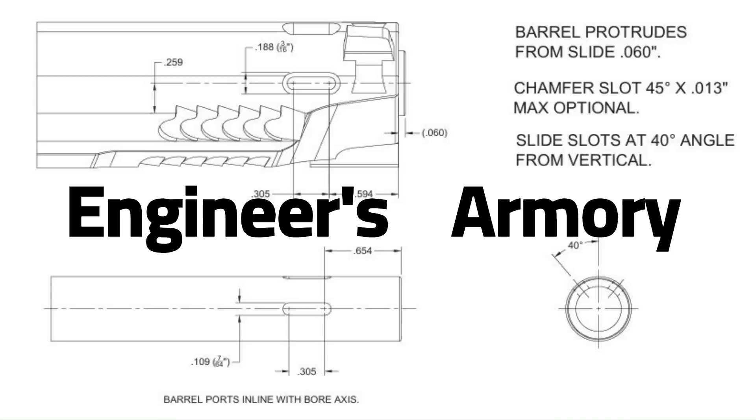What's up, everyone? This is going to be a two-part video. The first is a detailed look at the full 1911 barrel fitting process. I've wanted to make this for a while to round out my 1911 technical content playlist. The second part will be episode 2 of my building a double stack 1911 video series, where I fit the barrel to my pistol.

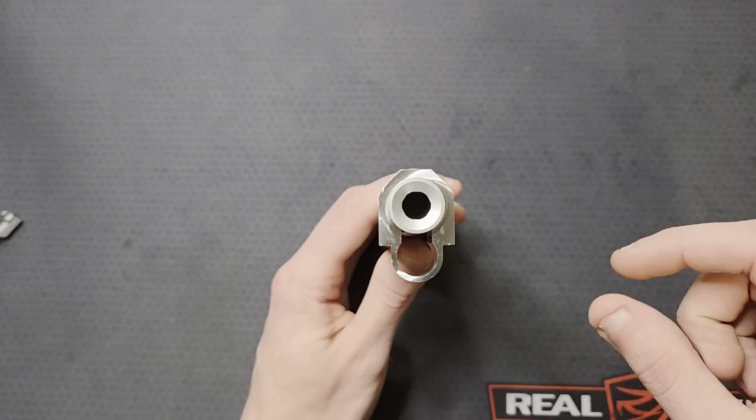I want to look at how the barrel is held still at lockup. All 6 degrees of freedom must be constrained. That means translation along 3 mutually orthogonal axes and rotation about those same 3 axes. At the muzzle end, the barrel is constrained from translating up and down and side to side within the clearances of the barrel OD and the slide or bushing ID. It can rotate a little bit like this, which is good because we need the barrel to tilt. It's free to slide along this axis and rotate about it.

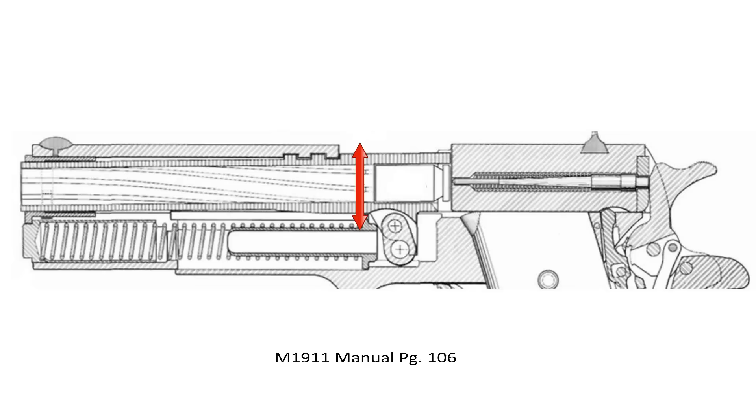At the chamber end, a nicely fit barrel is kind of pinched between the lower locking lugs on the slide stop cross pin and the top central point of the upper locking lugs. This is called the support triangle. Translation up and down along this axis is stopped by these 2 points. And rotation, if we consider the lug contact to be the pivot point, is stopped here and here. The barrel is constrained from rotating this way because the lower lugs are contacting in 2 places across the slide stop pin.

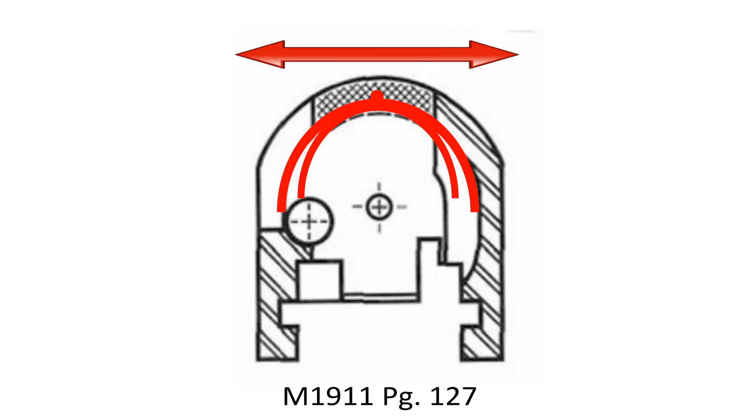If I push a circle into a circle, it centers itself into a point in line with the applied force. Now what if both of these circles are actually cylinders? Their 2 central axes will tend to align when you push them together. At the upper lugs, a circle meets a circle and the barrel centers itself, preventing translation this way. But the upper lug surfaces are cylindrical, so that also prevents the barrel from rotating this way because of the tendency of the axes of the 2 cylinders to align. And at the muzzle end, the barrel is being pushed down into another cylinder, preventing it from translating this way and rotating this way.

The bull barrel cylinder is cut out on the bottom, so it's actually contacting on two edges, but they're doing the same thing. With a bushing barrel, it's a full cylinder.

Constraining translation in this direction, which we know the muzzle end cannot prevent, comes from the chamber hood and upper barrel lugs being pinched between the slide lugs and breech face. On some ordnance spec pistols, the hood doesn't contact the breech face, but this face does right here. This is unlikely on any gunsmith fit barrel.

What are some relationships that don't contribute to constraining the barrel? Hood width doesn't - I mean, it could, but I don't think it's supposed to. It's generally clearanced as a final step to the fitting process.

The barrel link at lockup shouldn't be doing anything. Any surface or point of these lower lugs or ramp, except right here and right here, where it contacts the slide stop pin. This radius and kind of vertical face on the bottom of the lugs does contact the slide stop pin. This doesn't really constrain the barrel to the slide, it stops the forward movement of the slide and barrel together.

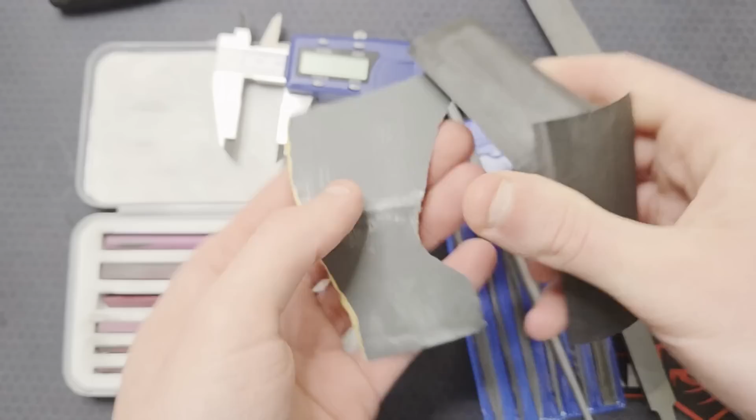You will need feeler gauges, a couple of which you'll need to modify. You need calipers, a selection of stones and files, fine grit sandpaper, a Sharpie or some layout dye, maybe some lapping compound. Clay helps for taking lug engagement impressions, access to a mill and fixture, or an indicator or a jig for fitting the barrel hood length and width by hand. Personally, I wouldn't do this without access to a mill.

Hood length gauge or inside micrometers. Firing pin port gauge is really nice. A lug fitting file. A lug centering block. A barrel holder and a lower lug cutting tool. A chamber finish reamer - I would recommend cutting fluid.

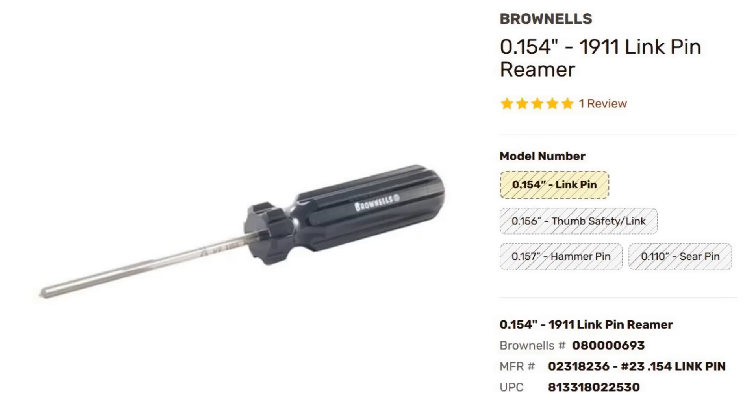Head spacing gauges are not necessary but may be nice. A reamer for the barrel link pinhole will most likely be needed. If you're fitting a barrel bushing, a lathe will really make that easier.

This basic process is outlined in the M1911 Kuhnhausen manual, pages 125 to 135. I'm omitting quite a few details for simplicity and time's sake. There are some things that could be done in a different order, or aren't even called out in the steps on those pages, so I'm putting them in where it makes sense to me. There is some subjectivity with this order of operations, but I don't think what I'm presenting is blatantly wrong or would lead to ruined parts.

The scope of this process will be limited to gunsmith fit barrels. They have extra lower lug material. Generally these slots here are shallow. They have a short chamber, and the hood is too long and too wide.

I'm finding as I work through this process that having a barrel and slide from the same manufacturer is nice. These are both from Atlas. Any high quality parts should be within spec, but if any barrel and slide combo are going to have dimensions and tolerances with the best chance of agreeing, they're probably going to be ones from the same manufacturer.

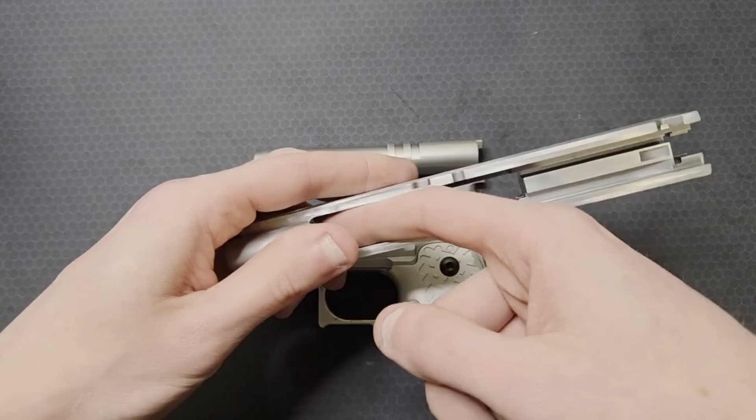There is technically a first measuring step that I am skipping, but I will cover it later in the horizontal bearing surface check section and explain why you're probably not going to do it. First, it's a good idea to inspect the slide, barrel, and frame, look at any contact areas between the barrel and other components, maybe lightly polish or deburr the barrel passage in the slide, break any sharp edges on the lugs, but just barely - things of that nature.

Muzzle end fit is important, but on bull barrels it will likely be dictated for you. The slide barrel passage spec is from .699 to .702, and bull barrel diameter is generally .693 to .695, leaving us with a diametrical clearance range from 4 to 9 thousandths. I just checked that the barrel slid in there and cleared the upper lugs on its way in. There are some comps and sight blocks that thread on and their OD will need machined to fit the slide.

In a bushing barrel system, Kuhnhausen says the barrel fitting is done with a slightly loose bushing. This is the way I've seen some professionals do it too. Check that the temporary bushing doesn't interfere with the barrel as you're fitting. However, I didn't see it directly stated when you should fit the final bushing.

How much of that fitting do you do with the looser bushing? I think I figured it out as I've worked through this process, and we'll put that step in where I think it goes and makes the most sense to me. Again, there may be some ambiguity or subjectivity with the order of these operations.

Measure the slide hood slot width and the barrel hood width. Take material off the hood until it just slides in all the way back up against the breech face, and don't clearance it any more than that right now.

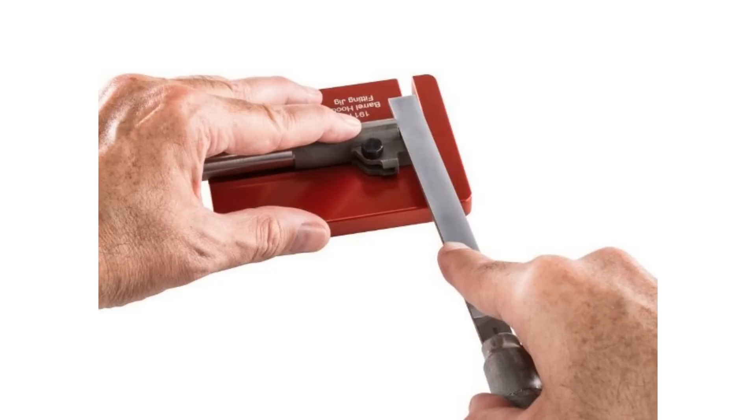There are fixtures for milling these hoods that will greatly reduce setup time. EGW makes one. There is an Apex Tactical fixture to be used with a file, but it doesn't look like it'll help you keep the hood sides square.

Now that the hood slides back up against the breech face, material needs to be taken off this surface until the hood slides all the way up and stops on the upper lugs, in a condition called 100% vertical lockup. We want this because it will maximize accuracy by producing the tightest barrel fit.

On the slide, measure the distance between the breech face and the forward locking lug. Because the lug surface is offset inward from the ejection port, a special tool is required. There are gauges for this. EGW makes one. I used a 1 to 2 inch inside micrometer.

Measuring the hood length on the barrel is easy with calipers, just like that. See how much needs to come off. 10 thou needed to come off this one.

Again, not a good thing to do by hand. The surface is likely to wander. Machine all but maybe a thou off and fit by hand.

Keep this surface as square as possible. Take a tiny bit off and check it. Sharpie on the surface helps to see if material is coming off evenly.

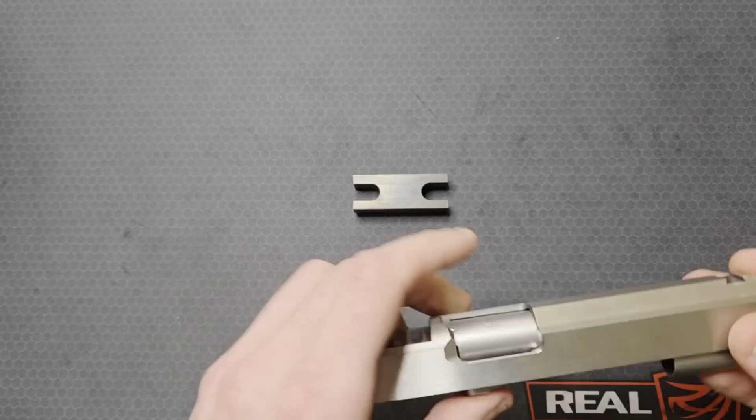Just take off enough material that it slides up and down freely, but does not have any play back and forth. Make sure the barrel is solidly stopping on the upper lugs and not interfering with something at the muzzle end, like the bushing skirt or the barrel passage with a bull barrel. It may feel springy up towards the top if it is.

Now that the hood adjustment is done on this face and mainly done on these two, reestablish chamfers if needed, break edges, smooth it up so it won't have any issue sliding in and out of lockup easily. I got a little generous with these chamfers right here, but these other ones are more reasonable.

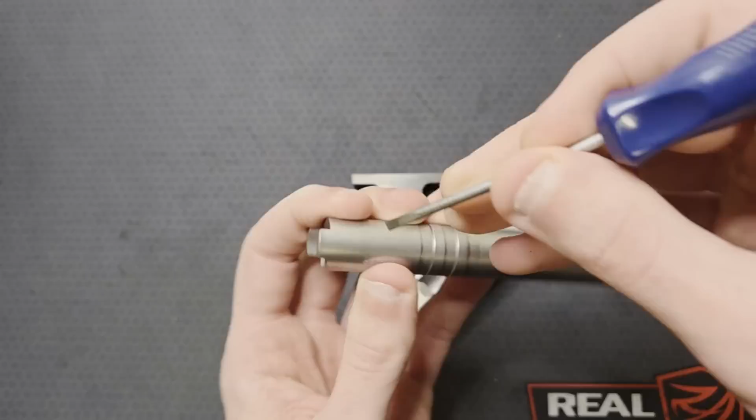I had to chamfer this corner, this guy, and this guy. This chamfer was still there after I removed my material, and I broke some sharp edges down around here with a stone.

Now that we can push our barrel into 100% lockup, we need to check where the firing pin port in the slide ends up in relation to the chamber. Center the lower lugs with one of these blocks and put firm pressure on the barrel.

You can buy gauges for this. I went ahead and machined my own. I can drop this in and see that the little nipple on the end slides right into my firing pin port without any resistance.

Another way to check this would be to take the primer out of a case and fill the primer pocket with clay. The chamber of a gunsmith fit barrel will be short, so it probably won't go into lockup. You may need to trim the case shorter.

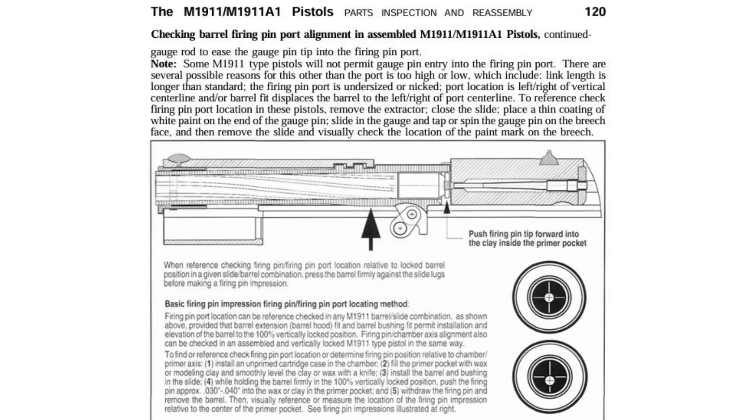Once the case is in there, you could drop the firing pin in from the back and see where it hits the clay. If it's off side to side, that might be an issue. There could be something wrong with the machining of the slide or the barrel, maybe a non-concentric chamber or a firing pin hole that's drilled off center.

You're unlikely to run into this with quality parts. If the firing pin port is high, meaning the chamber is low, that's not a huge deal. Most gunsmith fit barrels err on the side of shallow slots right here.

Remove some material until the chamber goes up enough to center the firing pin. If the firing pin port is low, meaning the chamber is high, the slots in the barrel could be too deep. The barrel passage diameter could be too large, meaning these lugs are too high up. It's unlikely that you'll run into this with a gunsmith fit barrel and high quality parts.

So how far off center is acceptable? I couldn't find a spec, so I looked at the tolerancing on the ordnance dimensions and did some math. Remember, these diagrams are for 45 ACP chamberings and a 92 thousandths diameter firing pin. Firing pins now are commonly around 68 thou.

I'm only considering the barrel and the slide relationship at 100% lockup, which is where we are at in this process. Possible deviation will increase when the slide and barrel are on the frame due to tolerance stacking of the frame rails, pinholes, pins, less than 100% vertical lockup engagement, etc.

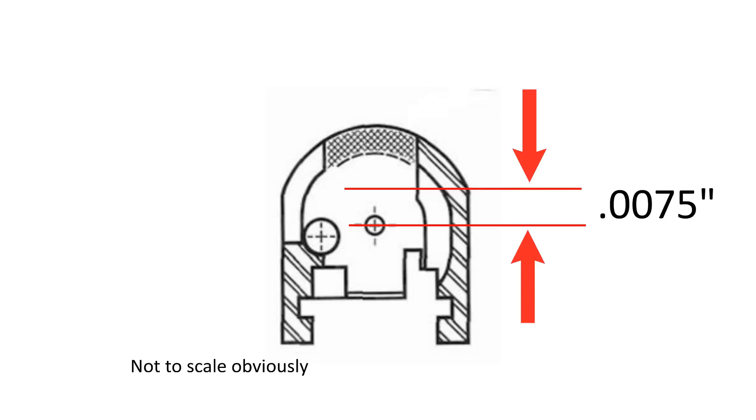I calculated that there is an allowance for the firing pin port to be displaced from the chamber center by about 7.5 thou. So a 15 thou range in the vertical and horizontal direction based on the dimensional tolerancing of the barrel and slide mating features, clearances, and firing pin port location.

This is a rough calculation. I'm guessing the acceptable operating range is a bit wider than that. If the firing pin is too far off, it may pop primers or the firing pin could be damaged, leading to all sorts of reliability issues.

Now this is the point. Barrel lug slot depth would be adjusted to achieve vertical firing pin port alignment at 100% vertical lockup. Brownells makes a special file for this. It has a narrow cutting face and dead sides so that no material will be taken off the vertical faces of the lug slot.

Don't cut any slot lower than 63 thousandths. You really shouldn't have to. That is the maximum slot depth according to ordnance spec.

This requires that the barrel has enough extra material on the lower lugs. If the chamber goes up, there still needs to be enough meat here to cut away for proper fit with the slide stop pin. A gunsmith fit barrel will likely have more than enough.

You shouldn't have to worry about it, but it doesn't hurt to check. You should really have one of these tools for this project. Use that in your barrel alignment block to make sure your chamber is in lockup.

You should see lug material sticking through your slide stop pinhole. That means there's enough material there.

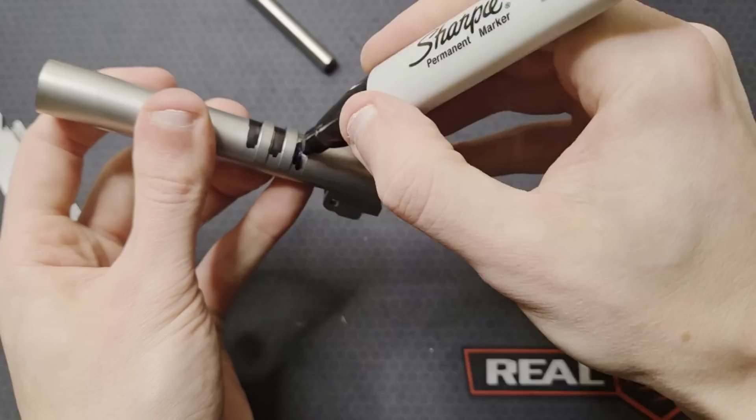To figure out where the lugs are contacting, mark them with a Sharpie or Dykem, push the barrel into lockup, and maybe give the lower lugs a little tap with a soft mallet to make a mark. That will show you where material needs to come off.

It may be easier to see what Sharpie gets left on the slide. Likely only the rear lug will be touching. Take a little off, check, repeat.

Take material off evenly and try to maintain that constant radius. Don't make a flat spot or a facet. I needed to take a little material off my rear barrel lug slot to get the chamber up higher. I was able to use my 1911 slide rail file that had a narrow cutting edge and two dead sides.

I want to discuss vertical lockup engagement. This is a hot topic, so keep in mind this is just my interpretation of the information I have found, but I will also be presenting my own calculation. I hope it makes sense and also doesn't have some glaring issue that completely nullifies it. I'm trying to demystify this all to myself as well.

In the context of fitting this barrel, this slot is 44 thousandths deep after my adjustment. If I fit the lugs properly, I will maintain 100% engagement here, or 44 thousandths of an inch on this vertical lug face. Is that enough?

This is going to be a long section, but I think it's a valuable discussion to have. Remember, timestamps are a thing. Skip it if you want.

This is more broadly about assembled pistols, not just the barrel and slide relationship we've been considering so far. The fit of the lower lugs on the slide stop pin, the frame rail aggregate stack height, pinhole location, and pin diameters, etc. can all affect vertical lockup engagement. A production or ordnance spec gun with no hand fitting will likely not have 100% lug engagement.

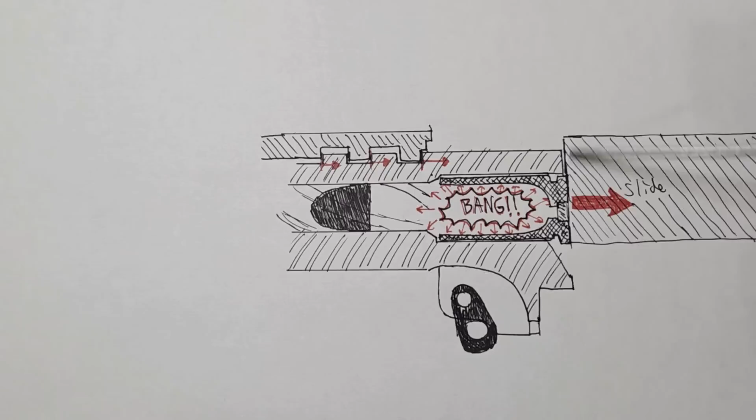The cartridge case slips in and out of the chamber. There may be some friction on the way out after the round is fired and the brass is expanded. However, the majority of the rearward force, which is a reaction to the momentum and energy of the round being fired and the pressure spike in the case, will be imparted on the breech face via the case head.

Initially, the slide and barrel travel rearward together. That initial pressure spike presses the case back into the breech face and starts the rearward motion of the slide. The barrel gets pulled along with it only by the small contact of these vertical lug faces.

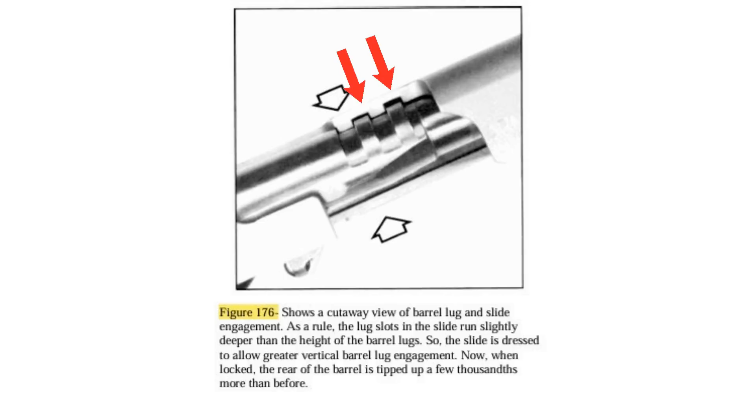Let's cover some geometric and dimensional considerations and how to measure engagement. The barrel tilts down towards the muzzle end at lockup. The chamber area and slots in the slide are machined at a slight downward angle too, but probably not as much, so each lug moving forward will have fractionally less engagement. By how much will depend on the fit of the parts in the pistol. That's why lug engagement is measured here at this first lug.

The forward two slots in some barrels may be deeper than the first. The slots in the slide should be clearanced for the barrel lugs. Contact should happen like this, not like this.

Vertical engagement is usually given as a percentage. How much of this total face height is contacting the lugs in the slide? I don't find this very useful. For an ordnance spec barrel, these slots can be anywhere from 53 to 63 thousandths deep. On gunsmith fit or match barrels, I've seen this range around 42 to 58 thousandths. So 60% on one barrel probably won't be 60% on another. If you have 100% engagement, but the slot is only 10 thousandths deep, that's not enough.

To measure engagement depth, measure down to the hood of the barrel from the top of the slide at lockup. Now pull the slide to unlock it and hold it at the point just where the barrel clears the lugs in the slide, and measure again. Then you subtract those two values. For percentage, you would divide that by your total barrel lug slot depth and multiply by 100.

Another way is to put some thin strips of clay in the slots, coat the lugs with oil, talc, or graphite first so the clay doesn't stick. I got some children's modeling clay for this. It comes in fun colors, and this one tastes really good.

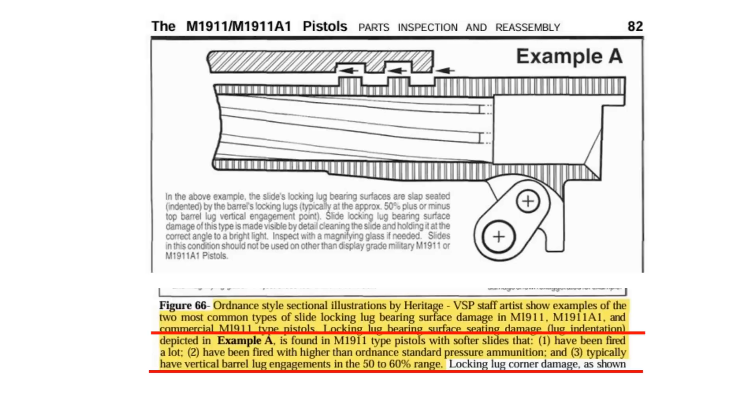The minimum ordnance spec slot depth is 53 thousandths. 50 to 60% of that is 27 to 32 thousandths of engagement. In the Colt 45 manual, page 51, I found this: a minimum of 42 thousandths, or about 70% of a mid-spec slot depth.

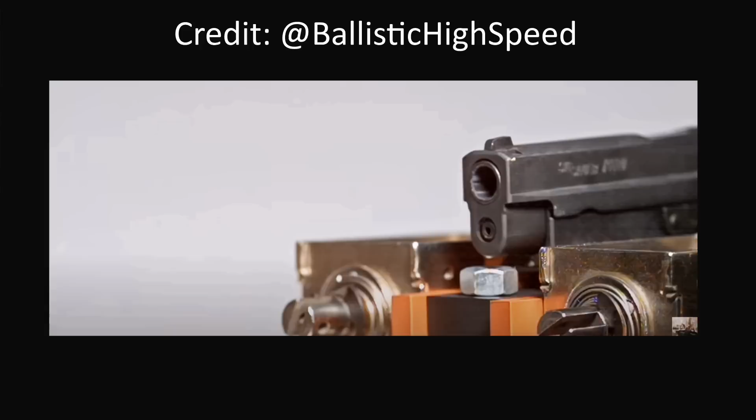I want to look at this from a strength of materials standpoint. For all the following calculations, I will be using the worst case scenario to give me the most conservative and safe estimate. I am assuming that all the force imparted on the slide will be transferred to only one lug, and the highest force the lug will see comes from the initial pressure spike in the case at the instant the round is fired. It's not feasible for me to consider energy, momentum transfer, slide, barrel, bullet, and gas masses, and include all that from the moment of ignition to the time the bullet leaves the barrel. I wouldn't know how to include those in my calculations. So much is going on in those few milliseconds.

Modern 1911 barrels are usually made from 4140 or 416 stainless, slides from 4140, 416, and I've seen some made out of 17-4. I'll link to some sources in the description with good information about these materials and where I got some of the charts and tables I'll be showing.

Yield strength refers to the stress a material can handle before it plastically deforms, meaning it deforms then stays that way when the force is removed. These materials are ductile and tough enough that they will yield before they fracture.

I have access to ASTM, ASME, SAE, and American Society for Metals books at work. These are the organizations that create standards for materials, among many other things, for use in a wide variety of industries. I looked up a bunch of specifications for these materials. I will be referring to these yield strengths in KSI, that is 1000 PSI. This is commonly how they're reported using imperial units. All of these materials are heat treatable for a wide range of mechanical properties.

4140 can have a yield strength ranging from 60 to 125 KSI. That lower 60 KSI yield is from a softer hot rolled and annealed or normalized state. It's unlikely that a 4140 slide or barrel would be machined from something this soft, even before coating or other treatment like nitride.

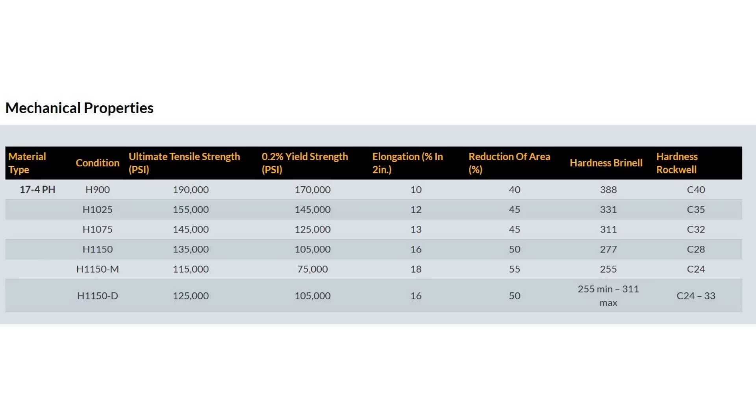17-4 stainless. Most of the 17-4 heat treatments I generally see are around that 105 KSI value. The lower 75 KSI value comes from a quite uncommon condition, H1150M heat treatment, so I wouldn't consider that one.

416 stainless has a range from 40 to 160 KSI. I deal with 4140 and 17-4 a lot for my work. I'm less familiar with 416.

Atlas says my barrel is heat treated to 40 Rockwell C minimum. I looked at the yield strength and hardness ranges of heat treated 416, and the ones that were around 40 Rockwell C plus or minus 4 had yield strengths from 115 to 140 KSI.

I will assume the lowest yield spec material used for the barrel or slide construction, not considering any surface treatment, is going to be 4140 with a yield strength of about 85 KSI in the softest common cold drawn and heat treated condition. That is the value I'll use for the calculations.

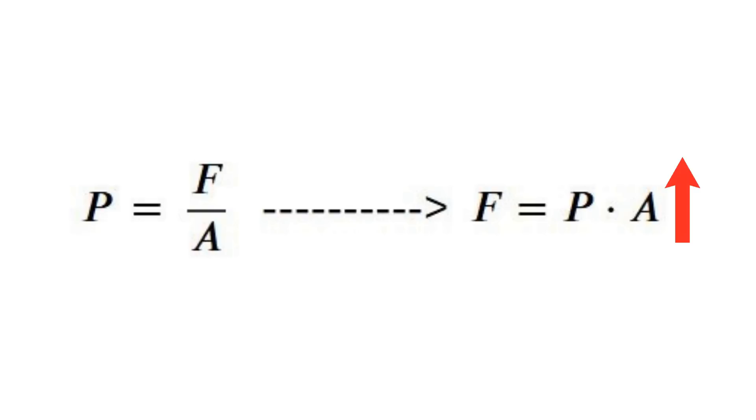I want to cover some relationships to make sure we're all on the same page. Pretty basic stuff here: pressure is force applied over an area. Rearranging this, we can see that force is pressure multiplied by area. If a force is distributed over a smaller area, meaning a smaller denominator here, that results in a higher pressure. If a pressure is applied over a larger area, that results in more force.

To calculate the force on the lug from the firing of a 9mm cartridge, I will be using the maximum average pressure for 9mm Plus P ammo given by SAAMI: 38,500 PSI. Maximum average pressure, or MAP, is defined as the recommended maximum pressure level for loading commercial ammunition. Link to this document with my page references is in the description.

I will assume that when the round is fired, the case will see a spike in pressure up to that level. The pressure will impart an impulse force on the breech face proportional to the case head area. I will assume the case head is at its maximum diameter specification and neglect the chamfer, giving us the highest resultant force.

38,500 pounds per square inch multiplied by the area of the case head, which is pi over 4 times 0.394 inches squared, gives me 4,694 pounds of rearward force on that breech face, which will then be transferred to a single upper lug interface, not two or all three.

I'm going to be considering contact stress on this lug face right here, not shear stress along the lug surface like this. There's much more surface area in this plane to resist the shear force. The smaller area of one of these faces is more likely to deform than the bulk of a lug to shear, especially at the rearmost lug that doesn't have a slot behind it.

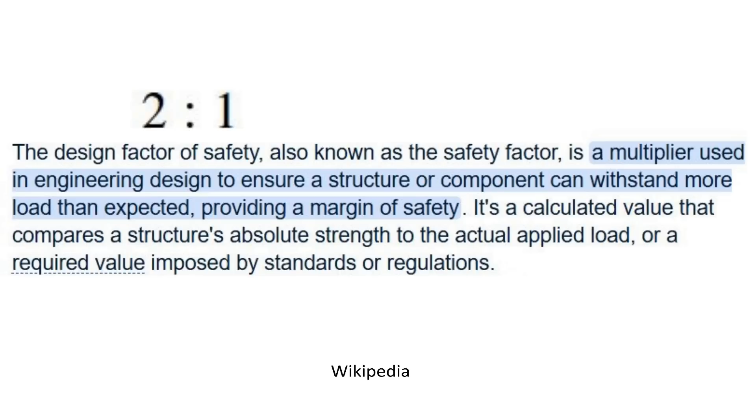I generally design with no less than a 2-to-1 safety factor. That means at normal operating conditions, a material should only see half of its yield strength, with margin for calculation assumptions in rare, extreme operating conditions and situations.

The force from the round being fired divided by the area of one of our lugs, which I am trying to solve for, is equal to the yield strength of 4140, 85,000 psi, multiplied by that 2-to-1 safety factor. So this right here is going to be 170,000 psi. Solve for area.

0.0276 square inches. Now I need to correlate that to the lug engagement depth. In my 3D modeling software, I've made a sketch of the locking face area using the minimum ordnance spec for the barrel OD. I can adjust the engagement depth value here, then extrude this into 3D space to measure the area of this face.

I adjust that dimension and check the area until it matches the area I just calculated. This occurred at about 40 thousandths of engagement depth. My model of the contact area is idealized, so this won't be representative of the real world, where actual contact area will vary from pistol to pistol and likely be a bit less, but hopefully accounted for with my conservative calculations. So that's my best estimate and recommendation for minimum vertical lug engagement: 40 thousandths of an inch for 9mm chamberings.

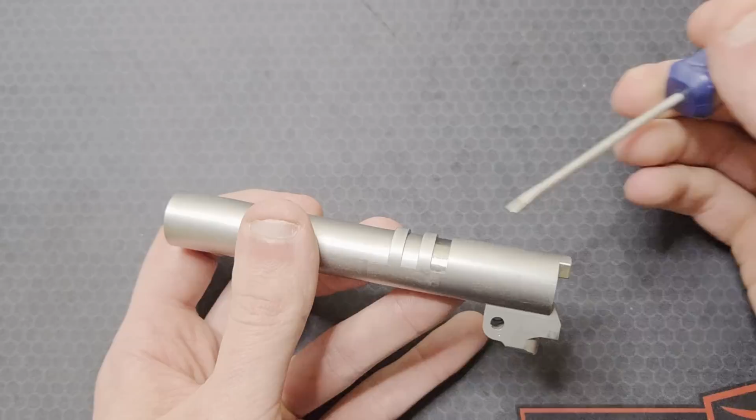Depending on the barrel, this will result in different percentages of engagement, which is why I'm not reporting a percentage. I went ahead and repeated the calculation for other common chamberings of the 1911. The only two variables changing are the case pressure, the SAAMI MAP value, and the case head diameter, and therefore the force that the lug sees. The geometry and material properties stayed the same.

For 45 ACP plus P, 41 thousandths minimum lug engagement depth. For 40 Smith & Wesson, 42 thou. For 38 Super Auto plus P, 40 thou, the same as 9mm plus P. And for 10mm Auto, 46 thousandths.

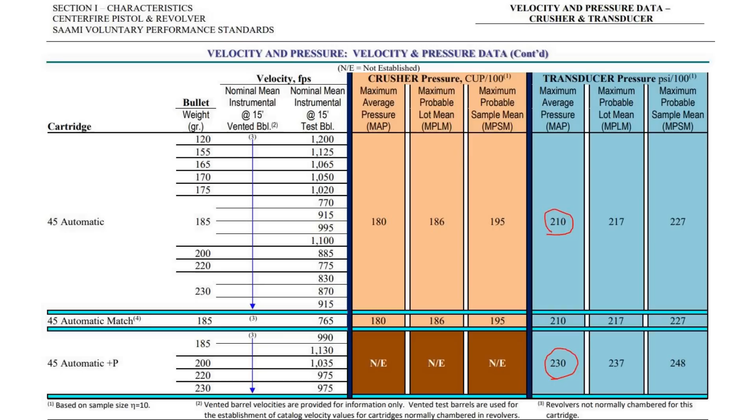Out of curiosity, I ran the calc for an ordnance spec 45 ACP pistol with 60 KSI yield strength material. This is likely more representative of early production 1911 slide material, probably 1018 or 1040, 1045 cold rolled carbon steel, that would have yield strengths from about 45 to 60 KSI. With the 2-to-1 safety factor, standard pressure 45 ACP ammunition, and one lug contacting, you would need 45 thou of engagement. This isn't really reasonable.

That is 85% of the minimum ordnance spec slot depth. A mid-spec ordnance pistol would likely not have that much engagement. However, if 2 lugs were contacting, each would need 24 thou of engagement. That's only 45% of minimum slot depth, so there would be plenty of margin for lower yield strength materials while still maintaining that 2-to-1 safety factor. We can also probably assume that the design was intended to have more than one lug in contact, being that there's 3 of them.

This was kind of a nice little gut check that my values with modern alloy carbon steel weren't unreasonable. I hope you were able to follow along with that calculation and it made some sense. I hope I explained it well enough and that my assumptions and the 2-to-1 safety factor I included seem reasonable to you. I am feeling good that the value I calculated is close to other values I've seen from multiple sources. If it was like 10 or 80 thou, I would know that I screwed up.

All right, shit, sorry about that. Back to the process.

This is an optional but recommended step, but also if you find an issue here, you're probably not going to do anything about it. In this step, we will see if all 3 of these vertical lug faces are contacting their respective slide lugs at the same time.

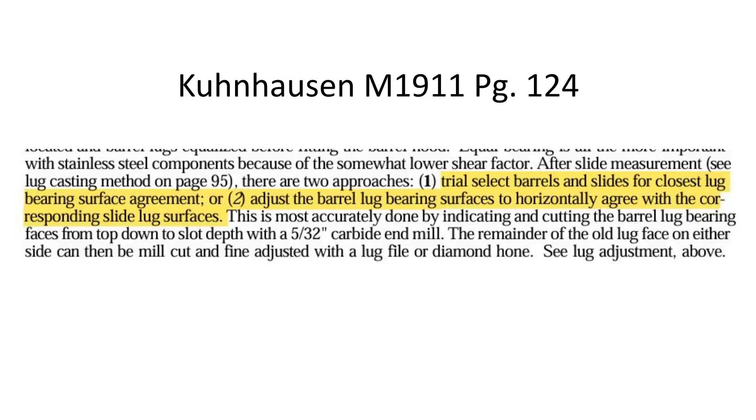You're probably not going to do this because it assumes 2 things: one, that you have special equipment to measure location of these lugs in the slide and barrel relative to the breech face, and two, that you have a bunch of barrels and slides to select from. You measure up different barrels and slides and match 2 with the closest lug spacing, then proceed with fitting from there. Also, let's think about this.

I'll go over how to check this in a moment, but let's say you only have 2 of the 3 lugs contacting. You would have to take a little material off the first 2 lugs to get this third one to be in contact. Well, you just changed the relationship of this lug to your barrel hood. We have already fit the hood length. You just brought the whole chamber forward by the amount that you removed from these lugs, loosening the hood fit.

So that's why I say you're not likely to do anything about this, even if you don't find all 3 lugs to be in agreement.

Couple of interesting historical notes here. When armorers or gunsmiths were fitting national match barrels to slides to improve accuracy, and they wanted all 3 lugs in agreement, they would equalize the lugs by removing material, then weld up the rear of the hood to add material, and fit the hood back to the breech face for no play at lockup.

On ordnance spec pistols, the hood usually isn't touching the breech face, so equalizing lugs while trying to maintain a tight hood fit was less of an issue.

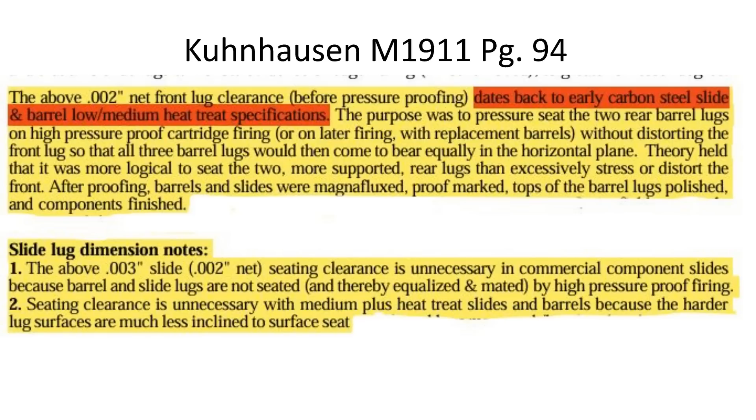I found this really interesting. The ordnance spec shows a net 0.002 clearance at the front lug. This apparently dates back to the days of softer, lower heat treat spec carbon steel slides. I don't know how common this practice was on an ordnance spec or other pistol back in the day.

That 0.002 net clearance at the front lug shows up here. I guess sometimes they would fire an overpressure proof round to seat the rear two lug surfaces and bring that third face into contact. The slide would deform at these two rear lug interfaces.

There's also a note here about how this clearance is likely not machined into commercial slides because they're made of harder material that wouldn't pressure seat anyways, so that brings us back to adjusting lug agreement by removing material, and then you run into that hood length issue unless you weld it up.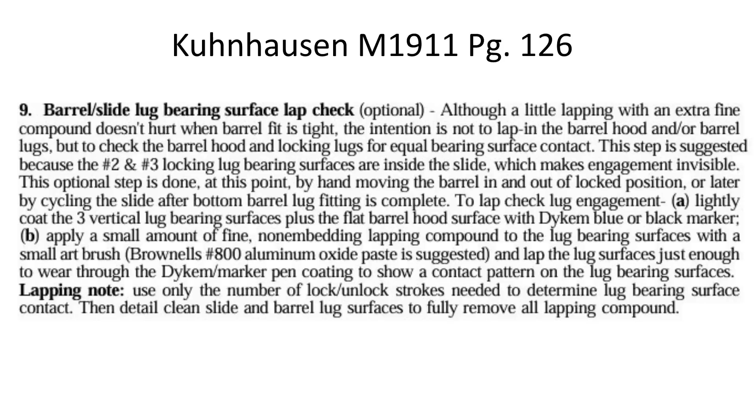Here's how you check the lug agreement at lockup. This process is outlined in the Kuhnhausen M1911 manual, page 126. I tried it and it worked pretty well for me.

Sharpie or Dykem the barrel lug vertical surfaces. You're not likely going to be able to see what the contact looks like just by pushing them together. Put a little bit of lapping compound on the lug surfaces after your marker has dried. Then move the barrel in and out of lockup gently a few times. The lapping compound will take the marker off where contact is occurring.

We're not trying to lap the barrel lugs into the slide or anything, just rub it enough to get the Sharpie to come off so we can see the contact area.

It looks like to me it wore off the Sharpie pretty evenly on all three lugs. You can still see a little stripe of it down here at the bottom of the lug. So that's looking pretty good to me. It appears that all three of my vertical lug faces are in good enough agreement.

Here's another argument for using a slide and barrel from the same manufacturer. They are most likely to be machined in a way for the best lug agreement.

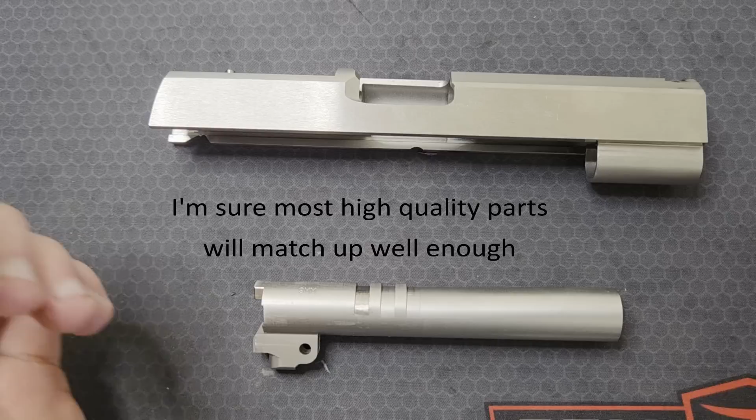At lockup, head spacing in a pistol chambered for center fire rimless ammunition, like the 1911, is defined as the distance from the breech face of the slide to the shoulder in the barrel chamber where the cartridge case would stop. Head spacing is critical to the safe operation of any firearm and needs to fall within a certain range for a given cartridge. It can also affect accuracy.

Excessive head spacing can result in inconsistent positioning of the cartridge from shot to shot. Head spacing that is too tight could lead to reliability or function issues.

On gunsmith fit barrels, the chamber is usually short and the hood is long. The barrel manufacturer doesn't know how much material you will need to take off the hood. Once it is fit to your slide, the chamber depth needs to be adjusted to achieve the proper headspace dimension.

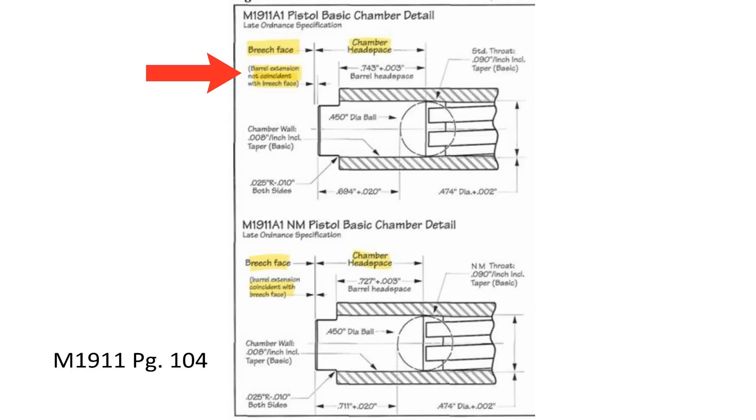In this case, the hood will be coincident with the breech face, and headspace can be measured from the rear hood surface to the shoulder in the chamber. This is not always the case. Some barrels have a short hood, and at lockup there's clearance between the hood and the breech face. You would have to account for that in your headspace dimension.

Let's look at the SAAMI 9mm case and chamber specs. Case length is from 744 to 754, and chamber headspace is from 754 to 776. That allows for a 0 to 32 thousandths clearance range between the case and headspace dimension.

I bought some SAAMI spec gauges when I ordered my chamber reamer. The go gauge is the maximum case length of 754, and the no-go gauge is the maximum headspace dimension, 776.

I've fit the hood to my slide, but I haven't adjusted headspace at all on this chamber. My headspace is 758, so the chamber is already deep enough.

My guess is that the chamber in the Atlas barrels is cut to a depth so that it doesn't need to be reamed after it is fit to an Atlas slide. This would simplify and speed up their pistol building process.

It locks up with the go gauge and won't lock up with the no-go gauge. So I'm going to assume my chamber and headspace are good to go.

It seems I won't be demonstrating this process, but I'll try to walk you through it. First, if my chamber was short, how would I choose what to set my head spacing at?

Kuhnhausen states the ideal headspace for an improved performance 1911 is the maximum case length spec plus 5 thousandths for operational margin with the 45 ACP cartridge. If we go by that recommendation, add 5 thou to that max case length of 754 for 9mm, that would be 759.

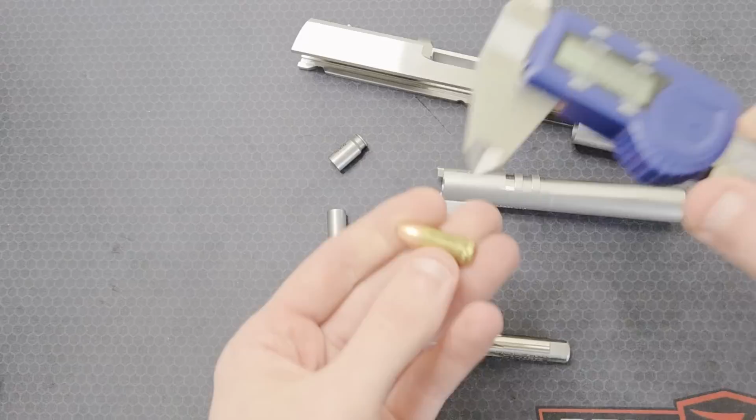I also measured some 9mm cartridges, not fired cases. The brass generally gets a little shorter when fired because it expands in the other direction, that is radially, to fill the chamber. I measured multiple cases from 6 different kinds of ammo, and they varied from 744 to 752, all within spec but quite the range.

Based on that and the SAAMI case spec, I think I would cut mine a couple thou deeper than that 754 maximum case length, but not quite to 759. I would have probably cut this one to 755 or 756, but 758 is just fine.

I'm not really trying to extract maximum accuracy out of this pistol. I mainly want it to run whatever ammo I feed it. I'm sure this pistol, when completed, will still be mechanically capable of more accuracy than I am as a shooter. I think headspace will largely be dependent on the ammo you're going to use in the pistol, your desired level of accuracy, reliability, and tolerance for operational conditions.

You need a chamber reamer for this. I bought this one from Brownells. It's a finished reamer for 9mm Luger. It's the only one they had in stock for 9mm, but this is the type I generally see people using for this. The chamber should already be roughed out.

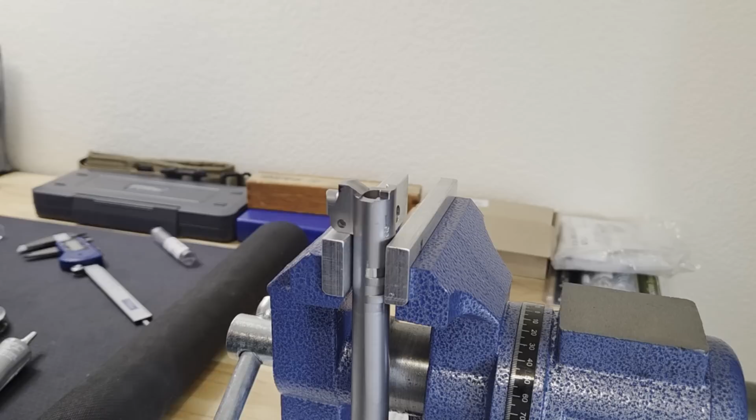Clamp the barrel in a vise, oil up the chamber. Cutting fluid would probably be best. You can put some grease in the flutes of the reamer to catch shavings as well. Carefully insert it into the chamber. We don't want those sharp cutting edges to chip or gouge anything.

Turn the reamer slowly clockwise to cut the shoulder deeper. It may also be cutting the taper into the rifling a little bit. Don't put any downward pressure on it, only the weight from the cutter and handle. You can use a T-handle or tap sockets or a wrench. I would recommend using a T-handle. I wouldn't use power tools at all, man. This is a delicate operation.

Cut a little, check. Cut a little, check. Remove chips, clean the reamer and chamber, and re-oil each time until you get to your desired depth. Then clean everything up really well. I'll talk about deburring and polishing the chamber later.

I don't really think these head spacing gauges are necessary if you have calipers, which are kind of required for this type of project. Check the specs, measure some of your ammunition, give yourself a couple thou more than the longest case. Keep it tighter and use ammunition with consistent case length if you want to maximize accuracy.

Now, this is the point where I would fit the final barrel bushing if this were a bushing barrel. Now that our chamber lockup position is defined, it makes sense to me to define the final position on the muzzle end before we cut the lower lugs. If you cut the lower lugs with a slightly loose bushing, the front of the muzzle may be in a slightly different place than it would be with your final bushing. This could affect the lockup fit.

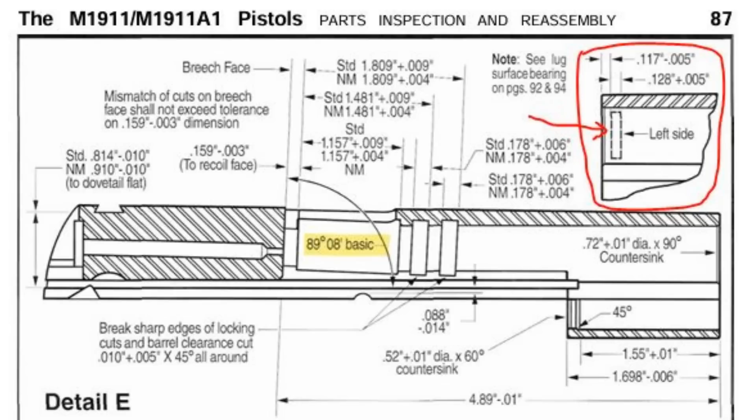I would adjust the OD to the point that I can install it and rotate it only with a barrel bushing wrench. Then oil it up and work it back and forth until it rotates with my desired amount of resistance. You want this as tight as possible if you're going for maximum accuracy. For less accuracy-oriented pistols, I make it a little bit on the looser side so I don't have to use a bushing wrench to take the pistol down.

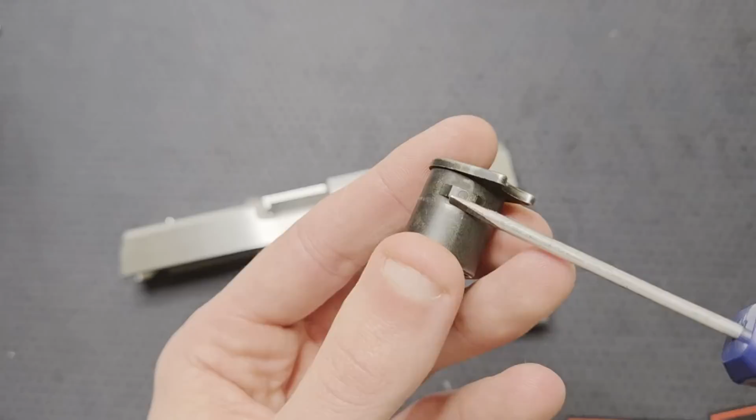The lug on the bushing OD may need adjusted to match the slot in the slide. After the OD is fit to the slide, adjust the ID until the barrel just slips through it. Put the barrel in, install the bushing in the slide, and see if it can lock up into the upper lugs. If it doesn't, I would start polishing the remaining material off with 600 grit sandpaper wrapped around a nylon rod or something. Check for barrel springing.

This is when the barrel hits the skirt of the bushing or binds on some other part of it and prevents it from going up into lockup without slightly bending the barrel or deforming the bushing in some way. Clearancing is necessary as outlined in this diagram.

I debated putting this next part in this section or in the link down section, but I think for the best bushing fit and tightest possible lockup, it makes sense to do it now. If it's done now, there shouldn't be any more clearance needed in the ID of the bushing, so the lugs will be cut to match that.

Just considering the barrel, bushing, and slide, when the barrel tilts down, it pushes forward about 1/4 of an inch. You need a minimum of 20 thousandths here. This is critical for link down clearances.

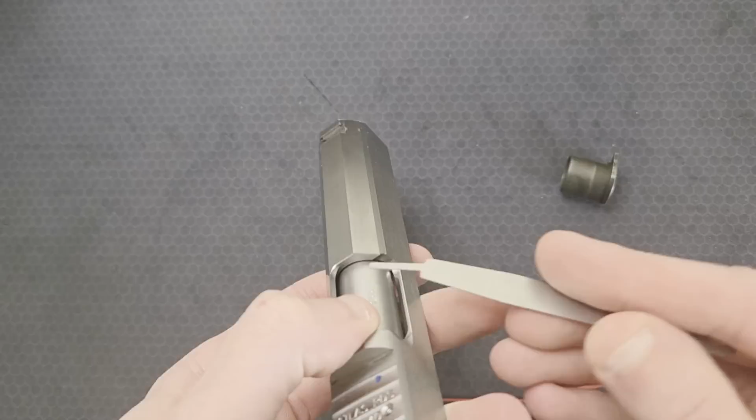You'll need to make this gauge, or buy a set for like $6. Take the 20 thou one to a grinder, make it really narrow, deburr it, bend it a little. If you don't have 20 thou right here, the interference could be coming from the bushing ID, the bushing skirt, or the spring plug tunnel in the slide. Be careful not to open up your bushing ID thinking the interference is there when it may be somewhere else.

Sharpie up the bottom of the barrel, install the barrel and bushing, tilt it down, and rotate it. You can see I have marks showing up here and here, meaning my barrel is contacting on the spring plug tunnel here and here. Clearance as needed until the modified feeler gauge will go in.

A lathe is best for ID and OD work. Machining the OD is tricky because you pretty much have to have something that holds it on the ID. There are ways to jerry rig it, and believe me, I've done it too. But if you're going to all the work to fit a barrel in the manner laid out in this video, you should probably fit your bushing properly by machining it.

Here's a good page from the Kuhnhausen manual about bushing fitting. Pause it if you want to read more.

Now it's finally time to cut the lower lugs, arguably the most important step in this process and the one with the highest pucker factor. First, check that the lower lugs or the barrel ramp fit in the cut in the frame. This slot may not be finished in your frame. The Clark Para ramp cut on this Sheely frame seems to be finished, and there is clearance for my lower lugs and ramp. Let's try to visualize what's going to be done here.

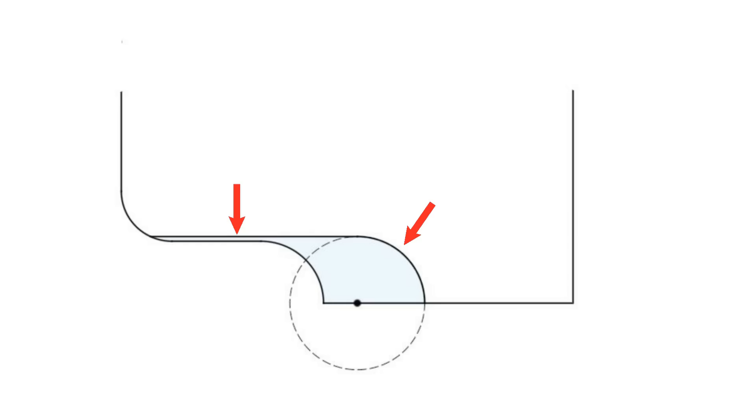Cutting the lower lugs in this manner with the chamber pressed all the way up into the slide will maintain that 100% upper lug engagement at lockup when the slide and barrel are installed on the frame with the slide stop pin. This will result in even contact against both lugs to create that support triangle with the center point of the upper lugs we talked about earlier.

This will also keep the barrel from tilting side to side. The rearward location of this radius in the lug, how far we cut it, will determine how far the slide and barrel can come forward on the frame. This is critical for thumb safety engagement and getting this disconnector pocket in the slide in the correct position over the disconnector hole in the frame.

I've seen the Hayes Custom guy cut these lugs completely by hand with a file. That requires such an insane amount of skill and experience. A mill could be used to remove most of the material beforehand, but a special fixture to hold the barrel would make it much easier.

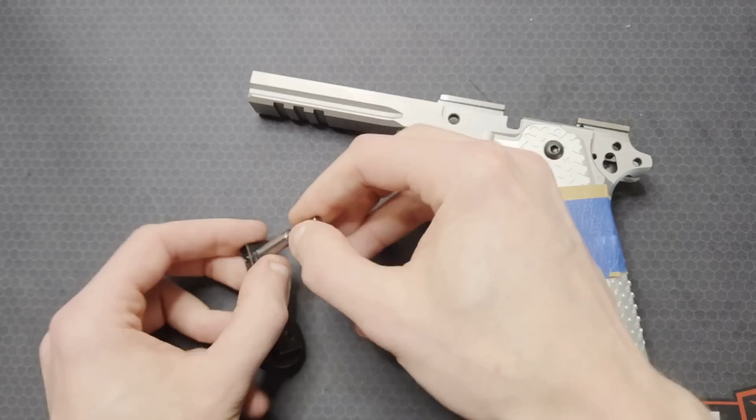Most of us will use this lug cutter tool. You stick it through the slide stop pinhole in the frame, retain it with this little bushing knob on the other end, and then spin it clockwise as you push the slide and barrel lugs forward into the cutter. There is a 186 cutter and a 195 cutter. I think it's a good idea to use the 186 first, then go to the 195, so less material is removed at a time and less forward force on the slide will be needed. This may result in a finer finish and longer tool life.

Slide stop pin diameter spec is 0.1985 to 0.2005. The pinhole in the frame is 201 to 203. Depending on your slide stop and frame, you will likely need to take a little more off after the 195 cutter is used.

Let's look at mine. My pin is right at 200. The pinhole in the frame is 202. The lug cutter pilot is 199, and the cutter is actually 194.

The cutter pilot and the slide stop pin will rest at the bottom of the hole in the frame. If the 199 pilot sits at the bottom of the 202 hole, that will leave 3 thou clearance up top. I will assume the 194 cutter is centered about the 199 pilot diameter, so that leaves 2.5 per side. So this cutter in my frame should leave about 5.5 thou of material on the lower lug below the top of the pinhole.

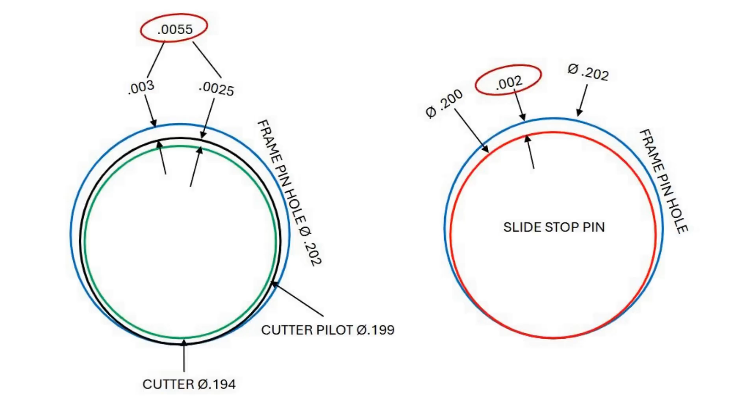My 200 slide stop pin sitting at the bottom of the 202 slide stop hole will leave 2 thousandths up top. So that leaves me with a difference of about 3.5 thou I will likely need to take off by hand. Is there a case where the 195 cutter will take too much material off? I did the math, and at either extreme end of the tolerance ranges of the pin, pinhole, and cutter, it will leave about 1 thou of material at the very least.

Put the barrel in the slide, center the lower lugs with the block, install the barrel holder, and tighten the set screw. With the frame held securely in a vise, put the slide on the frame, oil or grease up your cutter, and pull the slide back a little so the cutter can be put in.

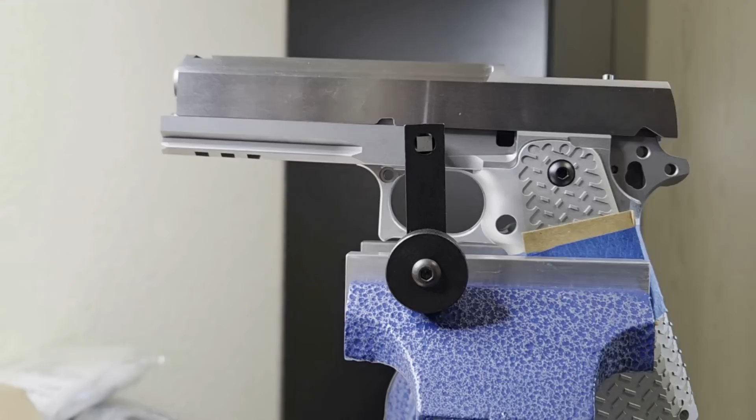Attach the handle to the slide stop side and insert the bushing on the other side. Turn it clockwise as viewed from the slide stop side while pushing your slide forward. Cut the lugs a little, then take the cutter out and clean off the chip buildup. Oil again, reinstall, and cut more.

I would start with the 186 cutter. Go until the left side thumb safety can just be flipped up into the notch in the slide. Then repeat the whole process again with the 195 cutter.

Now take the slide off, take out the barrel holder, put your slide and barrel back on the frame, and install the slide stop pin. Push the slide forward and the front of the barrel lug should start riding up on the slide stop pin, but there should just be a tiny bit of material left on the lugs preventing the barrel from locking up.

This is where you adjust that last little bit by hand. First, I would use a flat file to take material off the flat spot until your barrel can ride up on the pin. Mark up your lugs with a Sharpie, see where the slide stop pin hits, remove a little more, really sneak up on it.

Keep checking where it's hitting with a Sharpie to make sure it's contacting each side evenly. This is an exaggeration, but the lugs may look like this after that is done. When the slide stop pin hits the bottom of that radius where there may be a little step, take a round file of similar diameter to the slide stop pin and cut the radius back until the slide goes all the way forward and the thumb safety can be engaged.

You will be removing this last little bit in this step. Maybe give yourself a couple more thou clearance on the front edge of the thumb safety.

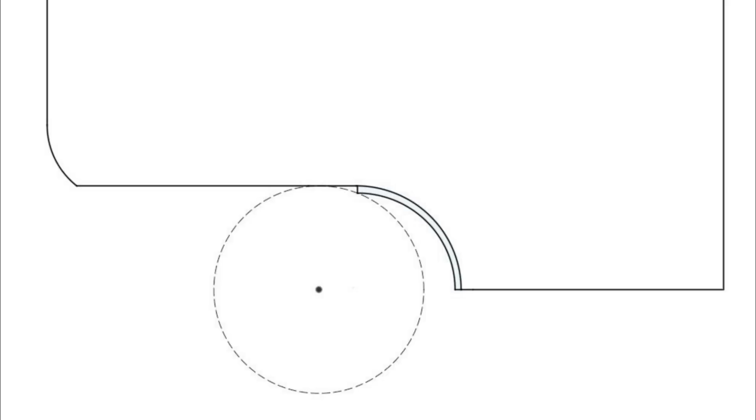I used a 3/16 chainsaw tooth file, the diameter of which is a little smaller than the 200 slide stop pin. As I was taking the last little bit of material off, I wrapped 400 grit sandpaper around it, which made it really close to 200 thou. Try not to cut down any more than the depth you did with the flat file, or that will create a little pocket the slide stop will pop in and out of.

This filing work is very delicate. Use a flat file with dead edges. Keep the files even across the lugs. Make sure they stay parallel and square. When you get close, it's like 2 file or sandpaper swipes, check, 2 more, and check.

The slide stop pin and lower lug relationship will look like this now. The upper barrel lugs will still be at 100% vertical engagement, and the slide will be far forward enough to engage the thumb safety. I went a little further on mine, maybe an extra 30 seconds or so, and the front of the slide and dust cover are flush. I could machine them flush later, but if I don't have to do that, that's preferable. On a short dust cover frame, this wouldn't be as much of an issue.

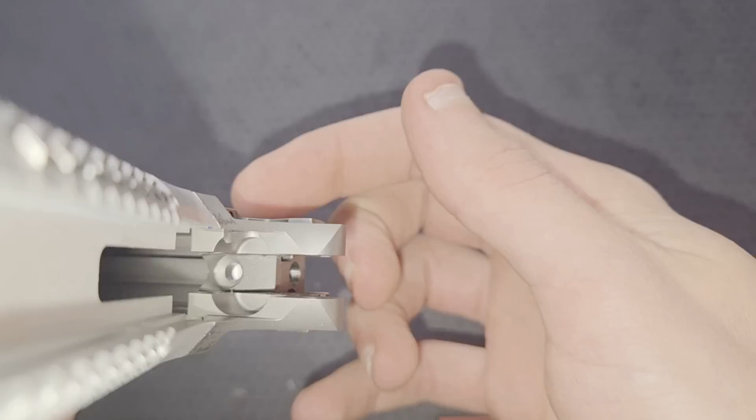When you are done, there should be some extra slide material hanging over the rear of the frame. This could be blended now, but you also want your extractor and ejector installed first. I will do this later and show it in a video where I blend everything on the pistol before sending the components out for refinishing.

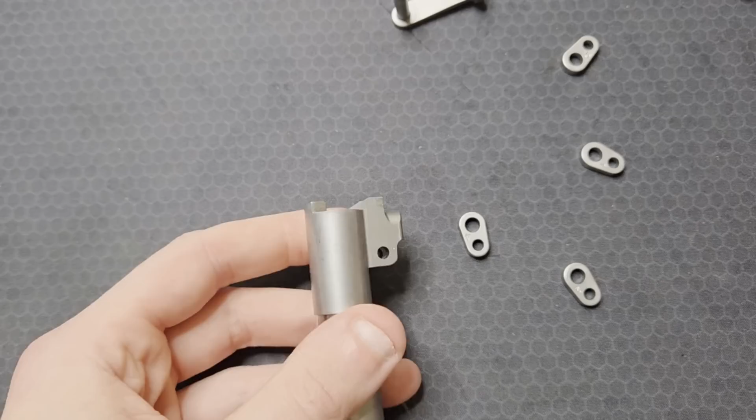To determine the link length, measure this distance right here on your lower lugs. You want this center bit of the link right here to be the same length. These are old ones I had laying around, of course none of which were the right size. This is also stated as the correct way to determine link length on page 134 of the M1911 Kuhnhausen manual.

Let's look at what happens if the link is too long or too short. Instead of watching me fumble around with some tiny parts, I made a 3D model that will hopefully be better. Right now I have the correctly sized link in this model. This allows the lugs to come up against and sit on top of the slide stop pin, maintaining the same relationship we just established earlier when we cut the lower lugs.

If the link is too short, it binds and won't allow the lugs to come forward anymore. If the link is too long, the lugs come all the way forward, but they are being held up above the slide stop pin by the barrel link. This is bad - our support triangle just went away.

The barrel will be unstable and wobbling around on the link if it has less than 100% upper lug engagement. In the case of our barrel with 100% lug engagement, the link would try to force the upper barrel lugs further than they can go, and the barrel would bind up between the link and upper lugs.

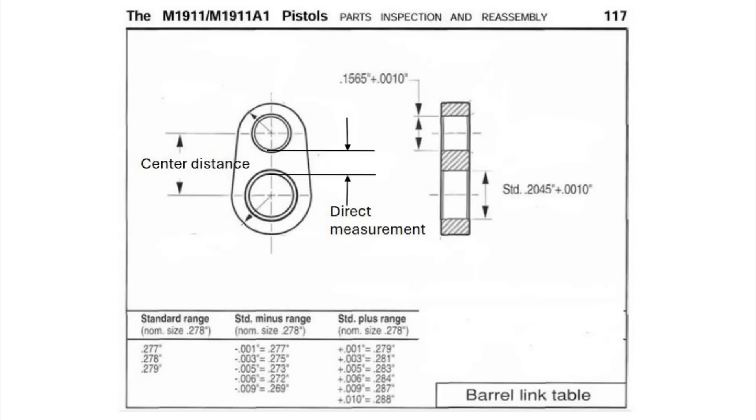Barrel links are defined by the distance between the center of the pinholes, and are also given a number. This is annoying because we want to know this dimension right here, so I created a chart to make this easier. The direct measurement in this column is based on the nominal link hole diameters, so these values are approximate and will vary a little based on the holes in the individual link you buy.

My barrel is measuring right around 97 thousandths right here. So I will go to my chart and find that value, or close to it, in this column. It falls between the number 2.5 and number 3 link sizes. EGW is the one who offers the half link sizes, by the way.

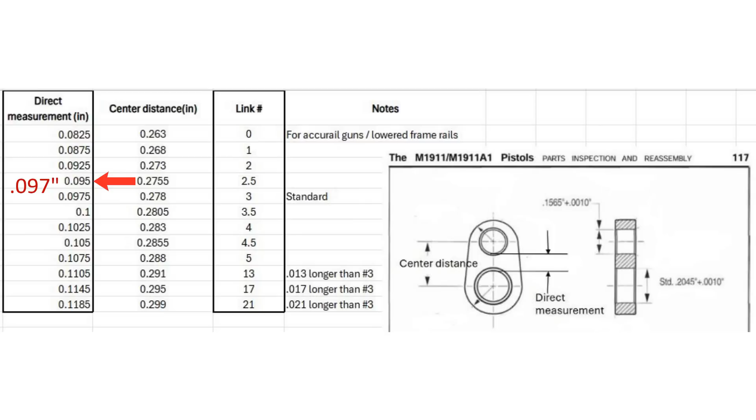Within ordnance spec, there is an allowable clearance range of 1 to 3 thou at the upper link pin and 4 to 7 thou at the slide stop pin. So there may be a couple of link sizes that work fine just because of these loose clearances. I would choose the one that is closest. My .097 dimension is closer to .0975 than .095, so I would pick link number 3. However, there are two arguments in favor of a shorter link length as it relates to barrel link down, which I will cover in the next section.

You may need to ream the pinholes before installing the link and link pin. If these holes are too small, you have to beat the hell out of the pin, and you may bend, crack, or damage the lugs, and then you get to buy a new barrel. Brownells sells the 154 reamer for this, but it's never in stock. You can buy it from McMaster - the part number is in the description. It's a number 23 wire gauge reamer. If the pinholes are small, ream it to the correct size.

Use oil when you do this and go slow. The Brownell's one has a handle on it. This one doesn't, so you might have to get creative. The pinholes in this barrel didn't need reaming.

Before installing your link, make sure the one you selected is the correct length. I'd recommend using a temporary pin like a gauge pin, a number 23 drill bit, or even your reamer. Put your slide stop pin through, push it back up against the lugs, and the link should wiggle around a little bit. It should be free to move in there.

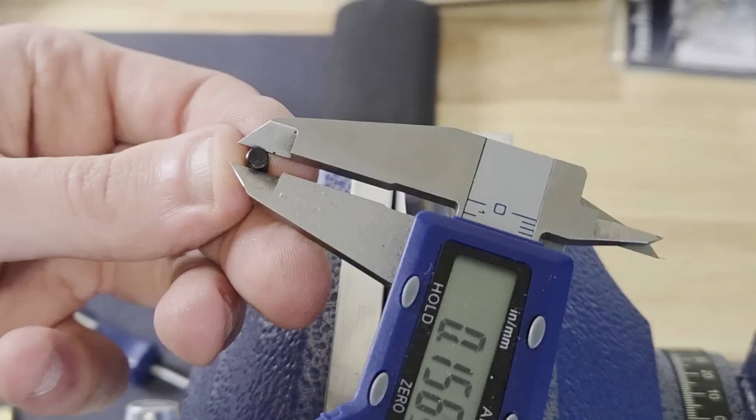The link isn't doing anything at lockup. My link pin was too tight in the barrel lug holes, so I opened them up very carefully with 600 grit sandpaper. Once the press fit on my pin felt correct, I oiled up the pinholes and installed my link. Then I found out the link was in the way of my file when I tried to clearance the lugs for the swing of the link and slide stop pin.

So I pushed my link pin out halfway and used the reamer as a temporary pin to clearance the lugs. Use a temporary pin, clearance for the swing of the slide stop pin, then install the link with the link pin. These may need to be clearanced a tiny bit more for proper link down, but we want the majority of it done now.

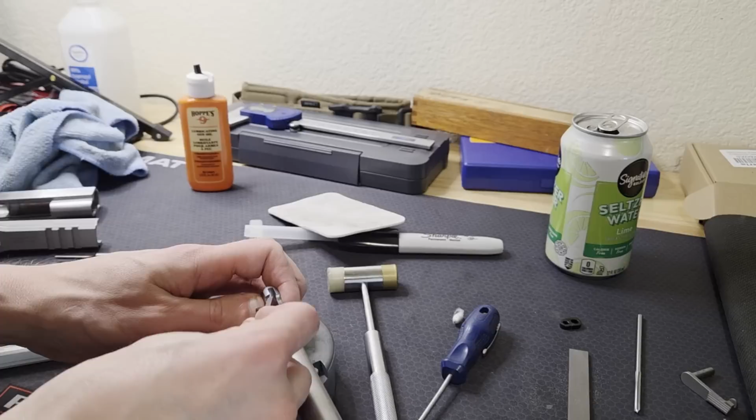This is going to be another long-ass section. Timestamps are still a thing. This is something that has confused me in the past. I've seen a lot of conflicting information, there's even conflicting information between the two Kuhnhausen manuals I have. Anyways, I think I have a better handle on it now and will try to explain it.

Link down refers to the movement of the barrel as the action unlocks. The chamber end is pulled down along an arc due to the barrel link pivoting around the slide stop pin as the barrel and slide move rearward together. This pulls the upper barrel lugs out of engagement, allowing the slide to travel rearward by itself and extract and eject the spent casing. Link down ends when the barrel comes up against the vertical impact surface of the frame.

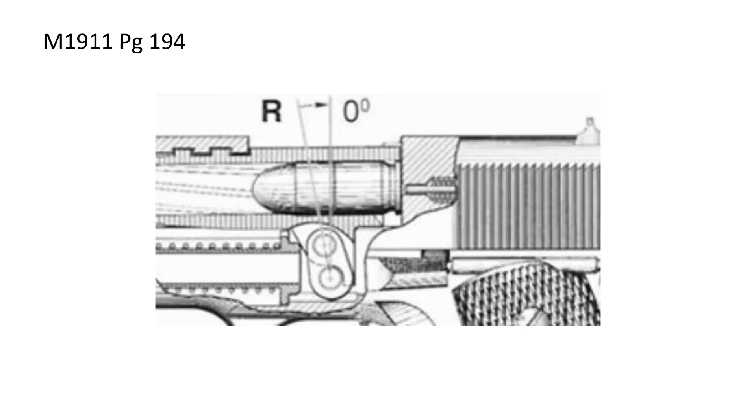Link up is the opposite, and we have mostly determined that by defining our lockup position, cutting the lower lugs, and selecting a barrel link. There's some clearancing we will consider that affects both link up and link down. I've heard link up or link down referred to as cam up or cam down, and this is the camming surface.

I don't agree with this nomenclature. A cam refers to a specific mechanical device that rotates and produces linear movement in another component. That's not what's going on here, but whatever, semantics.

The static component of link down is that linked down position. What is critical here is where the barrel lugs impact the frame and the clearance between the upper barrel lugs and the slide barrel passage. On an unramped barrel, the location of the barrel ramp in relation to the frame ramp is also important.

There is a dynamic part of link down that I think is generally referred to as link down timing. At lockup, the barrel link is not vertical, it's angled slightly forward. Link down is defined as the motion from when the link is vertical until the static, fully linked down position. You may ask yourself,

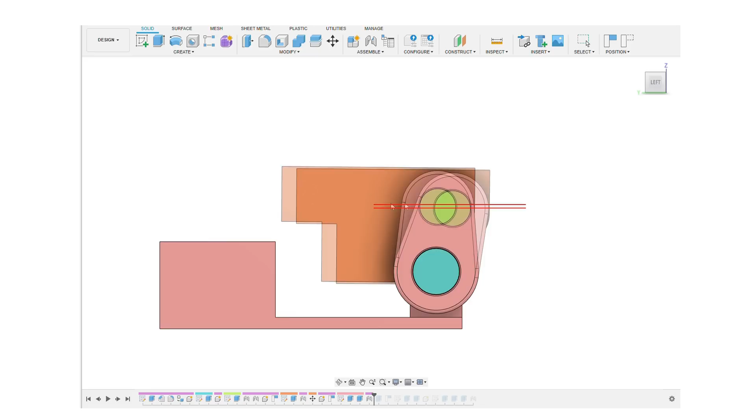from the locked up position with the link angled forward to where the link is vertical and link down starts, wouldn't the barrel rise slightly, binding it into the slide lugs? Good question. The clearances between the pinholes and pins should account for this.

I've also heard link down timing referred to as the clearances that are needed for the dynamic portion of the link down process to occur unimpeded. That pretty much comes down to making sure there's no interference here. Interference here would retard link down timing.

The M1911 Kuhnhausen manual includes the Schuemann barrel timing test on pages 195 to 197. The whole test is pretty much just making sure you have adequate clearances for the barrel link down motion, and that in the linked down position, the barrel is contacting the correct area of the frame. All the clearance numbers I state in this section came from the M1911 manual and the Schuemann link down timing test within it. They seemed reasonable to me.

In the fully linked down position, the rear vertical face of the barrel lugs should be up against the vertical impact surface of the frame. There should be no contact here. Doesn't matter if it's a ramped or unramped barrel. On a ramped barrel like this one, ideally we want contact around this circumference, not just a single line of contact, meaning the two mating radii should be the same or very close.

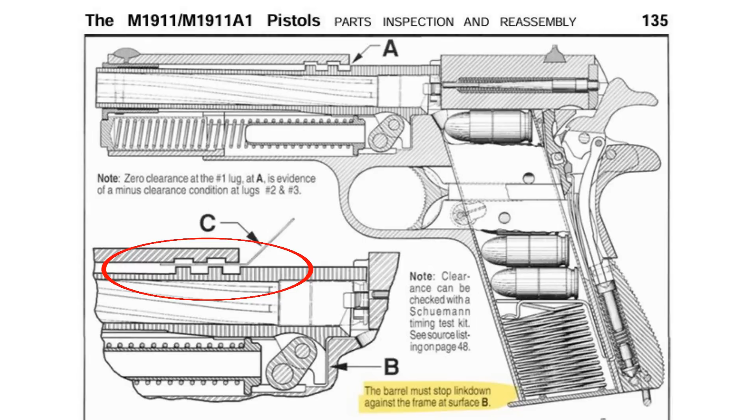At the upper lugs, there should be 10 thou clearance minimum with the slide barrel passage. Link length will affect where the barrel lugs hit the frame. We want them impacting like this on the vertical face with a little bit of clearance above this horizontal surface. If the link is too short or the vertical impact surface is too far back, then they will hit the

horizontal surface first. Why is this bad? It will stop the barrel from traveling down, but doesn't stop the barrel from traveling rearward. The barrel will tend to continue rearward due to inertia. This will tug on the link and the link will stop its rearward motion. Eventually this will fatigue and stretch or even break the link. When the barrel lugs hit the vertical impact surface like they ought to, that stops the rearward motion.

Then, kind of being pinched between the link pin and vertical surface will stop the downward motion. The rearward motion is stopped first and most of the barrel's momentum and energy is transferred into the frame, so the link doesn't see much compressive force as the barrel settles down, taking the clearance out between the pin and pinholes. If the barrel contacts the vertical surface first, the vertical surface is too far forward, or the link is too long, this may not allow the barrel to link down far enough, resulting in inadequate clearance between the upper barrel lugs and slide lugs.

This could result in lug damage during cycling. First, we need to make sure the barrel can tilt down enough in the slide. Barrel hanging in the slide and pushed forward just a little bit. We need at least 20 thou of clearance right here. I already mentioned this in the barrel bushing section. If you recall, the ID or skirt of the bushing may have needed adjustment.

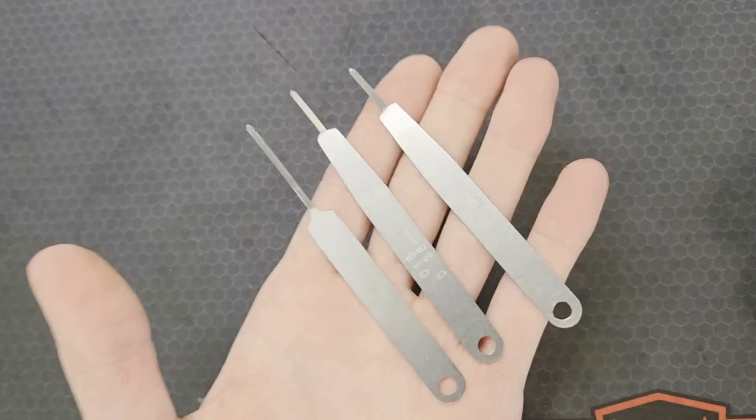I've made myself 3 special feeler gauges for determining upper lug clearance at full link down: 10, 15, and 20 thou thick. I don't have 20 thou of clearance right here. In this case, my bushingless barrel is hanging up on the spring plug tunnel, so I need to remove some material at the corners right here. Check for interference, sharpie the bottom of the barrel if needed, remove material, check and repeat until the 20 thou feeler gauge slides in easily.

After I clearanced the rear of the spring plug tunnel area, it was still not dropping far enough and I found contact at the lower edge of the barrel passage and needed to remove a little material there.

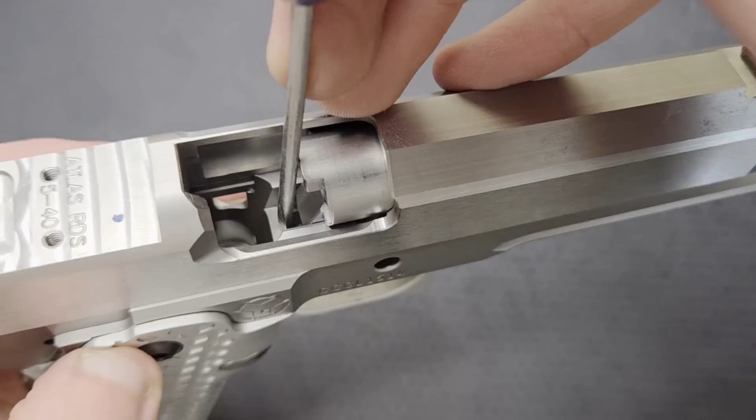Next, put the slide and barrel on the frame. Do not install the slide stop pin. Pull the slide back about halfway, push the barrel forward so the bottom of the barrel or barrel ramp is in front of the barrel bed surface right here on the frame. Now we need 15 thou of clearance right here. This should give us 5 thou more clearance than the 10 we should have with the slide stop pin installed, ensuring the barrel stops on the vertical impact surface and not anywhere else.

Check that the lug pocket in the frame is cut deep enough. Mine is, I can just look in the front and see it. I know the barrel's not hanging up in the slide anymore. That means the barrel is stopping on the inside of these 2 rails right here. You could confirm this by marking up the bottom of the chamber area and giving it a downward tap to see where contact occurs. I will remove material from these rails by cutting this chamfer deeper on both sides. It shouldn't take much.

Conventional wisdom is to clearance the frame, not the barrel. We don't really want to take material off the chamber area where the explosion is happening.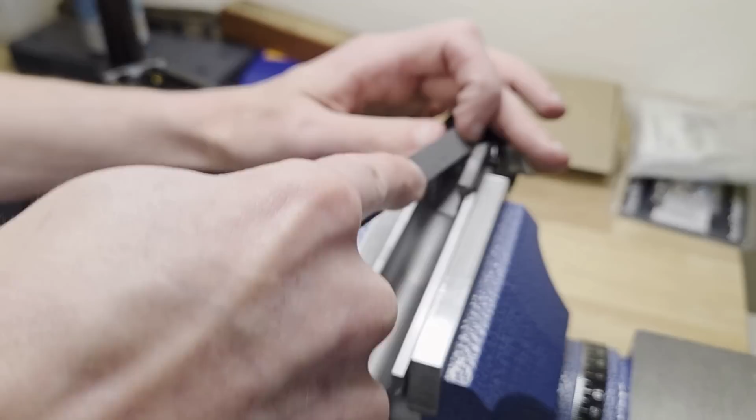Now, install the slide stop. Pull the slide back until the barrel fully links down. You should be able to insert a 10 thou gauge the length of the upper lugs, or about 5/8 of an inch, without resistance. Whether you have the clearance or not, we need to figure out where the barrel lugs are hitting down here in the frame.

This will also show us where material needs to come off to get the proper clearance up here if we don't have it. Sharpie the back of the lugs, the bottom side of the chamber or the ramp area here, and get that little radius marked up as well. Reinstall the slide and barrel on the frame with your slide stop.

Hold the muzzle vertically. Unlock the action, pull the slide back over the barrel about halfway. I'm going to put a little pressure downward on the chamber area with my thumb. Give the barrel a few taps on the muzzle.

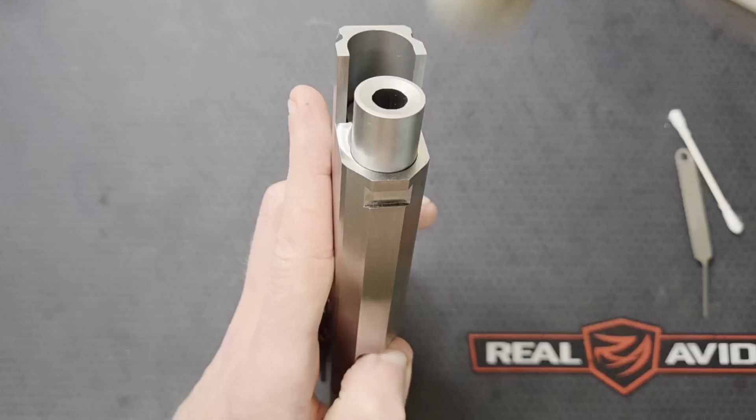Remove your barrel and look at the lug surface. If they're contacting on the vertical impact surface, like you see the marks here, but you couldn't get your 10 thou gauge in, that means the vertical impact is occurring too far forward. Remove the material from the vertical impact surface of the frame. Do not remove material from the barrel lugs.

Material should be removed from the vertical impact surface with a mill. There are specific cutters for the Clark-Para ramp and for standard unramped barrels. EGW offers both. To cut the Clark-Para vertical impact surface back, you come in at it this way. For standard barrels, you come in at it this way, and the cutter is extra long to clear the front of the frame.

If you don't see a mark on the vertical impact surface, and you do see one here, that means the barrel or ramp is hitting the horizontal frame surface first. Remove material from this surface until the vertical impact surface contacts.

In the case of my barrel, it was actually hitting right here on this radius. So I needed to clearance this radius first. Not a lot had to come off. I did need to give myself some clearance with the horizontal surface though, so I brought that one down too.

If you don't see a mark anywhere on these surfaces, you may not have created enough clearance in the previous two steps. Go back and figure out what's getting in the way. After every material removal step, check for contact by marking the lugs.

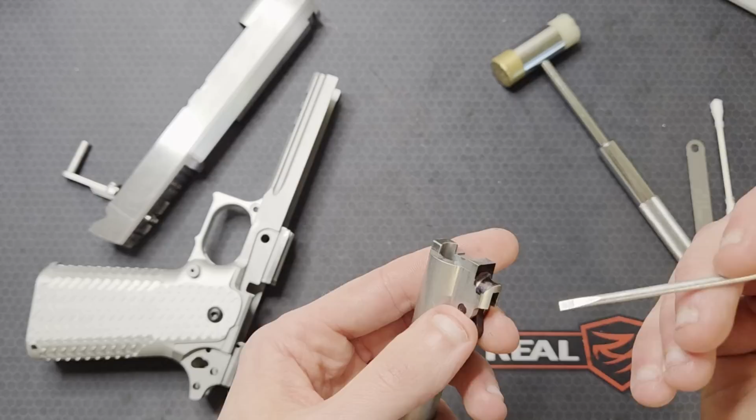Moving the vertical impact surface back may then cause contact with the horizontal surface. Now material will need to be removed here. You may have to kind of chase it around. There will also be a lot of variability in how much material needs to be taken off and where, based on the components and the fit of the individual pistol.

There's an argument for a shorter barrel link here. It's less likely that material will need to come off the vertical impact surface, and if it does, it will be less. Or maybe the horizontal surface will only need adjusted, which is generally easier to do.

In the fully linked down position, we should have a minimum of 10 thou clearance between all the upper barrel lugs and the slide barrel passage. The lower lugs or ramp should be stopping on the vertical impact surface of the frame, and when it does, there should be a minimum of 5 thou clearance above the horizontal frame surface. This could be confirmed with a clay impression or a feeler gauge.

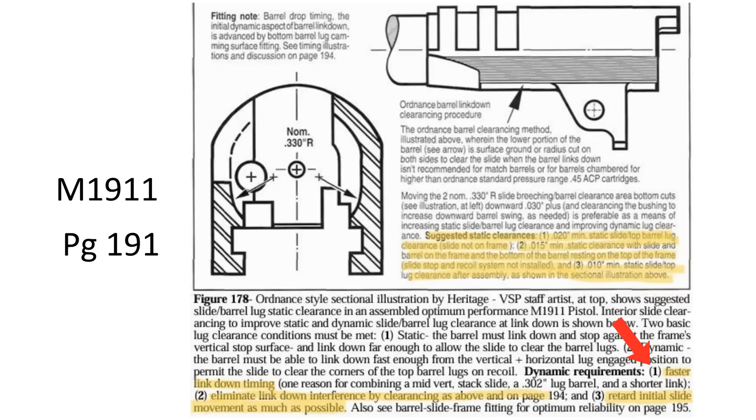Kuhnhausen lists 3 key points when considering dynamic link down. The first is that a faster link down is preferred, meaning the barrel lugs get out of the way of the rearward traveling slide faster. Fair enough. The link length affects how quickly the barrel lugs disengage from the slide. A shorter link will pull the barrel down quicker due to a tighter swing radius. Yet another argument for a shorter link.

I simulated lug disengagement with 2 different link sizes in my model, one 10 thousandths shorter than the other. With the shorter link, the barrel dropped out of the lugs about 4 degrees of link rotation before the longer link. This resulted in a 25 thousandths difference in slide position at the time of disengagement. Is this significant? I don't really know, but maybe it illustrates the point of what a difference in link length does.

Our link length is already set. A link in the middle of the range shouldn't cause any issues. A really long link in pistols with extreme frame rail vertical stack heights will delay link down and possibly cause problems. The second consideration is eliminating any link down interference that would delay or impede link down action. Cool, that makes sense. The third consideration, I don't know that I'm fully understanding it: retarding rearward slide movement as much as possible.

This seems to be an issue with higher energy cartridges. They push the slide back so hard and so fast that they try to overrun the barrel lugs and possibly damage them as they near zero contact and disengagement. A faster link down would help get those lugs out of the way faster, but slowing the slide down would as well. It seems both need to be considered with high energy cartridges.

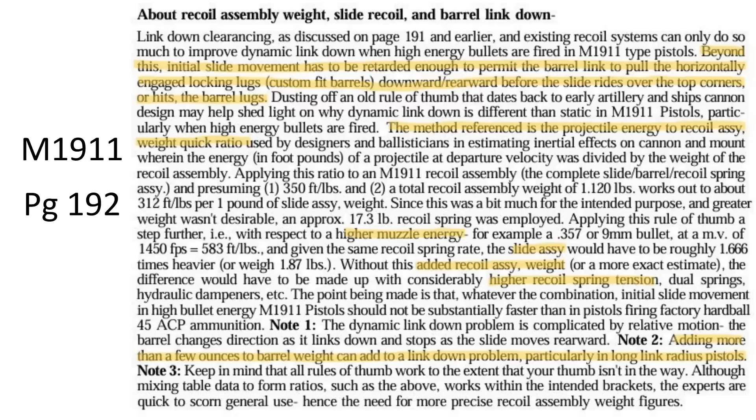There is a discussion about this in the Kuhnhausen manual on page 192. It relates to recoil spring force, recoil assembly mass, barrel mass, slide mass, and the energy of the cartridge. My main takeaway is that for relatively short or intermediate link lengths and less energetic ammo, it's not that critical.

It is interesting to note that the M1911 manual and Schuemann text both mention how hard it is to properly time barrel link down with a compensator or sight block. The extra mass out at the end of the barrel is counteracting the tilting motion, and more than that, the slide has a harder time accelerating that barrel mass so the lugs drop out of the way in a reasonable time. Interesting food for thought, but that's all the time I'll spend on this.

Our main concern with the dynamic link down action is unimpeded motion - clearance at the front of the lugs while swinging the slide stop pin. If the lugs bump on the slide stop pin on the way down during the unlocking motion, it will result in a loss of slide velocity. It will also impart some unnecessary impact on the upper lugs, and it will batter the lower lugs and the slide stop pin. This could be considered delaying link down timing.

Similarly, if it hits on the way back up, this is called barrel bump. The lugs will bump up over the slide stop pin. It may cause issues with the slide returning into battery, and it will batter the lugs and the slide stop pin. We already checked for this after sizing and installing the barrel link, but we need to check it again now.

When checking for this, Kuhnhausen says the recoil assembly should be installed, but using a lighter spring, replicating a more dynamic situation. Sharpie the front of the lugs, assemble and run the slide back and forth pretty hard a few times, check for slap or drag marks, adjust accordingly, and retest until they go away.

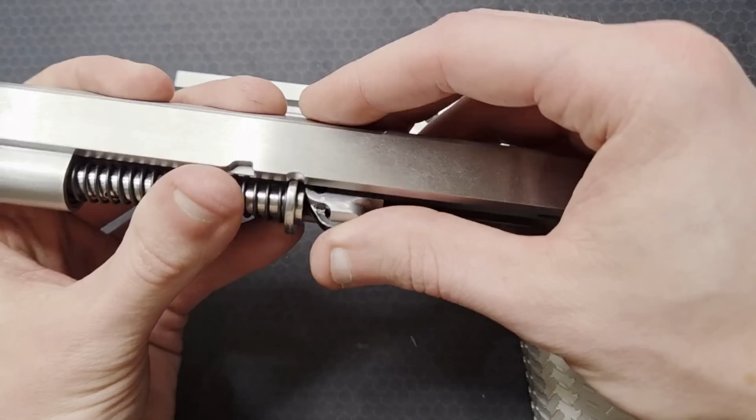Once the pistol is test fired, these lugs should be inspected for marks again. With this bull barrel, the recoil assembly is installed in the slide before putting it on the frame. It's not like a bushingless barrel where you can put your guide rod in and then drop the spring in, put your spring plug in through the front. The head of the guide rod comes up against the front of the barrel lug, so it makes it hard to see what contact there might be with the slide stop pin because it already puts a mark on it before you even get it installed on the frame.

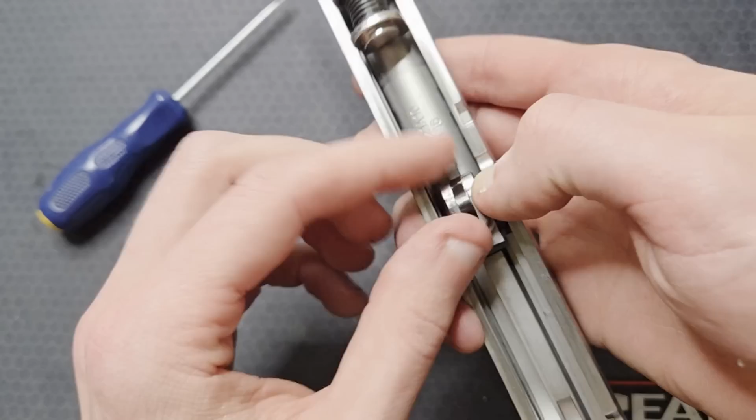So what I did is I kept the assembly compressed as I put my slide and barrel on the frame. Link up the barrel and pull the slide back to release the recoil assembly. If your guide rod has a pin in it to retain the reverse plug, you would use the pin instead. You should treat yourself to a toolless guide rod though. Then run your slide back and forth. Pull the slide back and compress the recoil assembly again. Catch it with your toolless guide rod. Then remove the slide. This will prevent the guide rod head from ever contacting the barrel lugs, so you know when contact with the slide stop pin has occurred.

Now that I'm done adjusting these lugs, I'm going to go ahead and break the outer edges.

There are some other considerations for unramped barrels, like the standard 45 ACP barrels. Since part of the ramp is on the barrel and part is on the frame, it would make sense we would want the ramp as low to the barrel bed as possible while still maintaining vertical impact surface contact. I still think 5 thou clearance here is reasonable, but keep it at that. The barrel ramp edge should be about 1/32 of an inch in front of the frame ramp. A little further is better than a little closer.

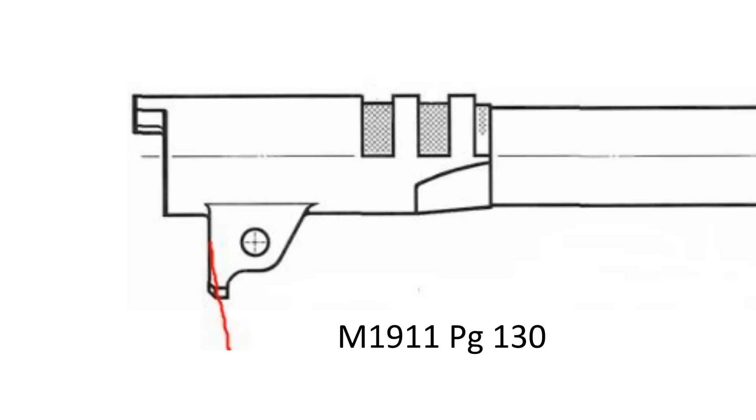The last thing may conflict with what I've presented up until now. When the lugs of an unramped barrel impact the vertical surface, we want to make sure we have contact here where the lugs are joined and the strongest. We can also have contact here, but not only here. If there's contact only here, the lower part of the lugs where they are split can be brought forward a tiny bit so they just clear. That seems to me to be the only case where it's appropriate to remove material from the barrel lugs.

This is where you would do the final clearance on the side of the hoods for the cut and the slide if needed. Kuhnhausen states 1/1000th per side minimum to ensure no interference and smooth cycling. I've seen as much as 5 thou per side.

I kind of messed up cutting my hood width. I'll explain that in the next part of the video, and I have about 4 thou per side already, so I'm going to leave it. If you take more material off now, recheck your chamfers and break sharp edges.

I didn't have to ream this chamber. I can look down in there and it looks pretty nice to me. I'm not super into polishing chambers. I will wrap some 1000 grit around something and get in there and just knock off any burrs.

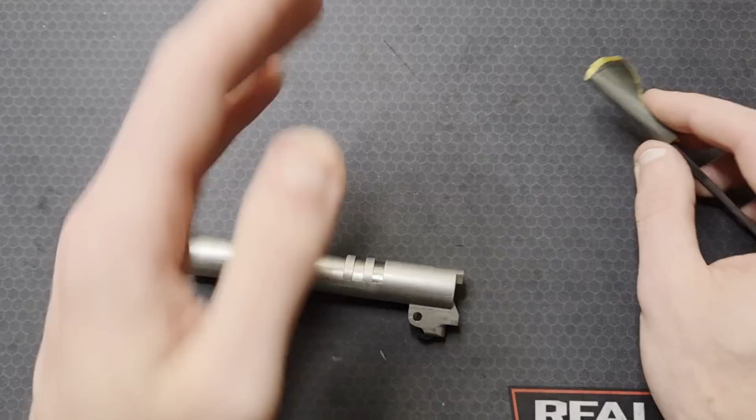This would be a good idea if you ream the chamber. I suppose you could get in there with a cotton buffing wheel and some polishing compound. You don't want to take too much material off, because that would loosen the chamber on the cartridge, which would result in accuracy loss.

So my barrel ramp kind of hangs into the magazine well a little bit. You can see it's actually kind of hitting my magazine body right there. I want to take that off.

I'm going to check that a round in the magazine will hit far up enough that if I bring this flat spot back, the round isn't going to nose into it. Mark it up from the bottom side to see how much needs to come off, and I'll just get rid of that with a file.

I'm going to put a little chamfer on this edge, and this edge right here, because sometimes when I'm putting on the slide, they kind of hang up right here as they go back into the ramp cut. Clean up the sharp edges between those chamfers I just cut.

I'm going to make sure I have a nice chamfer on the underside of the hood just in case a bullet noses up into it. It'll guide it into the chamber. I would say maybe 10, 20 thou here, then break the edge into the chamber, 5 thou or so.

On the bottom, I'm going to break this edge where the cartridge will crest into the chamber just barely. Any material removed here removes support from the case. Kuhnhausen states no more than 2 thou. That was regarding unramped 45 ACP barrels, but I don't think that's a bad thing to apply to ramped barrels, even though these have more case support.

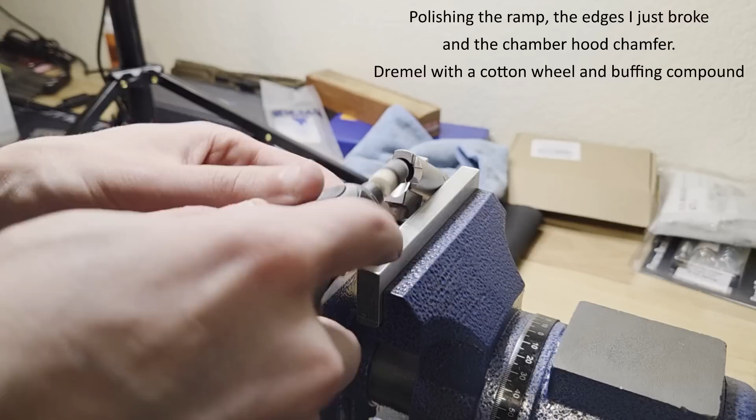I'm not hogging material, I'm not changing the angle of the ramp or anything.

There are a few things I'll be doing to this barrel, like a flush cut and crown and some aesthetic polishing, but those will come later and they aren't anything required for the process as outlined in this video.

That is the fitting process to the best of my knowledge. I hope I captured all the major steps and considerations. Hopefully, not only do you have an idea of what needs to be done, but why it needs to be done. Again, the order of some of these steps could be switched around. There will be some subjectivity regarding how they can be completed. There's likely some wiggle room around the final relationships and clearances between the components that I presented.

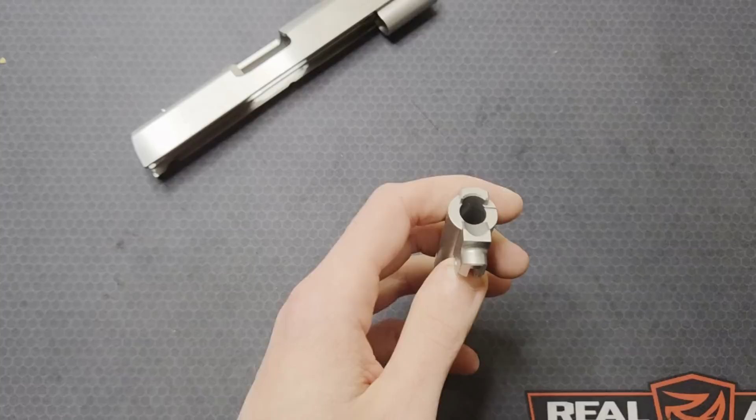The hood material that needed removed was offset. I took too much material off this side and incorrectly assumed very little or none needed to come off this side. I needed to take about 25 thou off. I figured I would take 24 off the thick side and be fine.

I ended up taking too much off, didn't leave any for hand fitting. Also, a bit more than I thought, that 25 needed to come off the other side. I machined the hood length and left 1 thou.

This was easier to do because the feeding was on the x-axis, which is much more stable than the quill. When I got to fitting the hood by hand, I was feeling for tightness to know when I was getting close to the correct hood length. This is part of the process you can't get a feel for unless you do it.

I didn't have a very good feel for it. Since I didn't take enough material off one side of my hood and too much off the other, my hood material was offset with respect to the slide slot when the barrel was centered in the slide. As the hood started going up further into the slide, it was binding up as the chamber tried to center itself in the barrel passage.

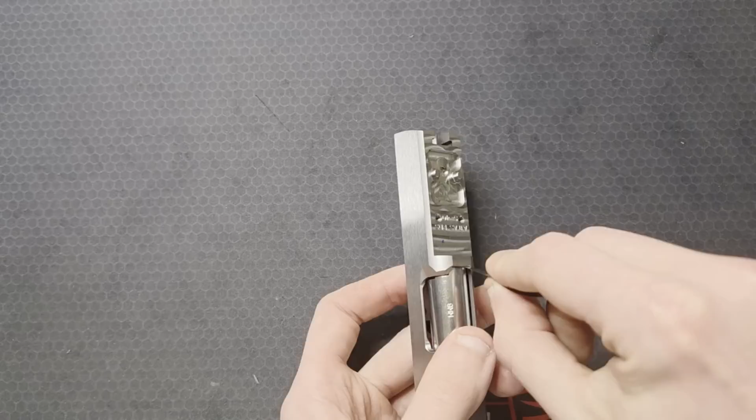I mistook the tightness due to the improperly cut hood width for tightness on the length. I figured it out and took material off the other side of the hood so it wouldn't bind up, but the hood length was about 2.5 thou short by that point.

The hood width clearance is sloppy. That's not critical, but I'm bummed about the 2 thou on the length. Will it negatively affect accuracy as it matters to me, or the longevity of the barrel? Probably not.

Cutting the lugs with the tool was pretty straightforward. I think doing it in steps, the 186 and the 195 cutter, was good. It didn't require as much forward force on the slide, likely easier on the cutters.

On the way in, the barrel lugs kind of skipped over the cutter and left a slightly raised, wavy surface in front of the radius. I tried to go back and cut it again, more slowly, but it didn't clean up.

I guess there was a tiny bit of flex somewhere in the system allowing the lugs to spring up over the cutter a little bit. Not a huge deal, that area was taken off during hand fitting anyways. I think this is an argument for less forward force on the slide when cutting.

I see Brownells sells a lever to wrench the slide forward. I wouldn't recommend that. The little shavings and shards that came off the hardened stainless barrel lugs were nasty. Watch out for those, that's not a kind of sliver you want.

Hand fitting of the lugs was difficult and nerve-wracking. Not one of those things you can get a feel for without doing it. I went really slow, checked a lot. It turned out fine. I got the slide and dust cover flush at the muzzle.

The disconnector pocket is where it should be. Thumb safety engages. The vertical lockup feels tight. All good.